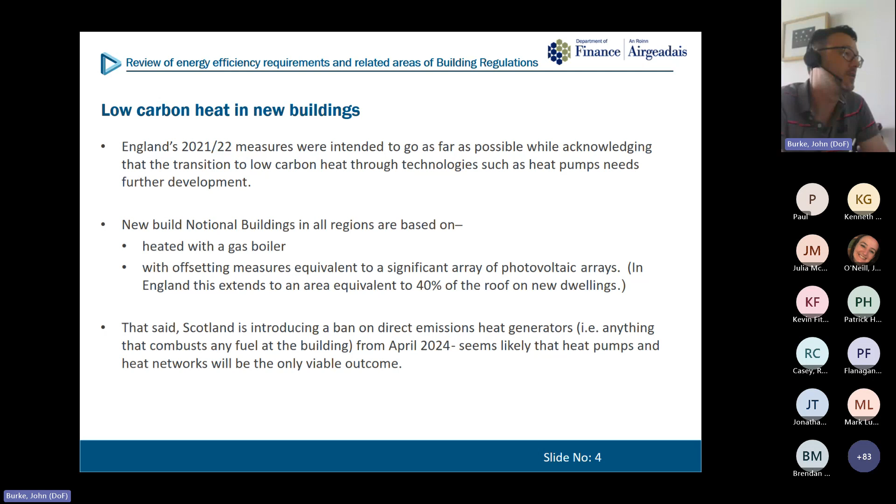So in terms of new dwellings, I'm expecting that everyone attending the seminars has some familiarity with building regulations, so you should be familiar with the notion of the current working practice.

You have a target carbon dioxide emission rate, based on the modelled assumptions or model performance of a notional dwelling of the same size and shape as the actual dwelling, but constructed to a very standardized specification. If you can meet the emissions of the standard building, or the notional dwelling, then you're deemed to have passed that requirement.

In Northern Ireland, our last uplift in 2022 brought forward manual betterment calculations to improve that. So if you're subject to the NZEB regulation requirements, you need to demonstrate a manual betterment of that, and we'll see an example of that later on. The phase 3 uplift we're looking at will be centred on dwellings, with 2 options, which would effectively remove the need to do that betterment calculation. The 2 potential options are for the notional dwelling: one following England's proposal of a notional dwelling specification based on a gas boiler and photovoltaics.

And then the other is looking at what happens if we were to move directly to a heat pump led specification. In that case we haven't put the photovoltaic array on the dwelling, but the heat pump is deemed to have the emissions performance requirements in that case.

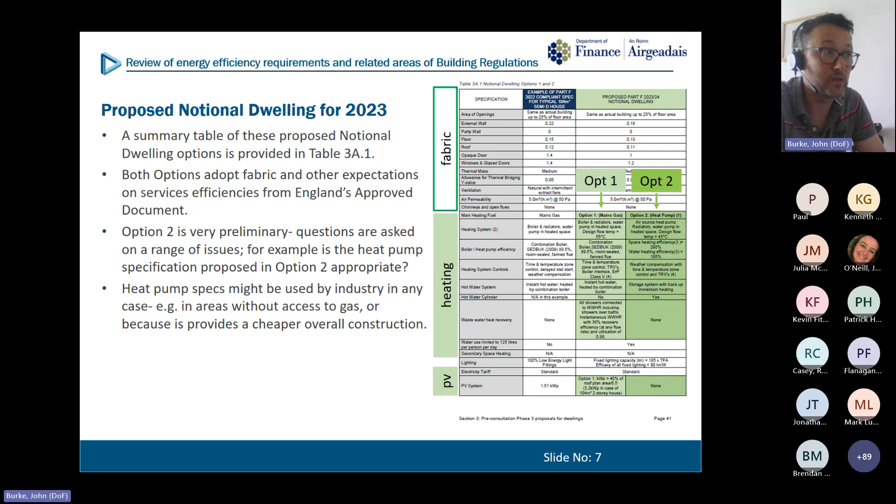So alternatives are likely to mean more heat pumps rolling out in either scenario. We've noted that 30% or more of new dwellings here are still being constructed using home heating oil, and that comes traditionally because we've had a Northern Ireland fuel factor, which we've highlighted alongside the Table 2.1 factors.

Those Table 2.1 factors previously, before the last uplift in England, gave easements on the emissions performance when you were using higher carbon fuels. It covered 50% of the difference, whereas with Northern Ireland adding the extra 1.14, there was no real penalty for using oil.

And you could construct an oil-fueled home and a gas-fueled home in Northern Ireland to roughly the same standards. So both our options, in option 1 and option 2, a really significant thing we're looking to do is remove those fuel factors. Those easement factors have gone in the other regions in the last uplift, and that's a really significant thing to be happening here.

It's going to be quite an ask, because it means the emissions performance really will have to match or outperform that of the notional dwelling specification.

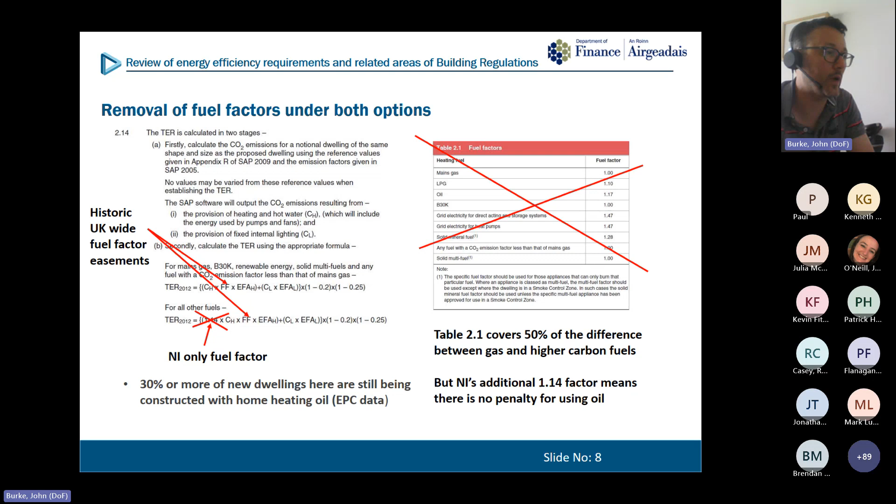So we've modelled a semi-detached house as a good interim. It's not detached, it's not a flat, and it's not a terrace. It's got a reasonable amount of fabric, so we can try and see how these things might look or work out. Capital costs haven't really been looked at yet, so we'll be interested in any feedback there.

But assessments of similar options by the Scottish Government in 2020-21 tended to suggest there was a net benefit to society of £46 million, whereas there was a net cost of £250 million in moving to the heat pump led option, similar to option 2. So that's why we're a bit reticent about just going straight ahead with option 2 and the heat pump led specification.

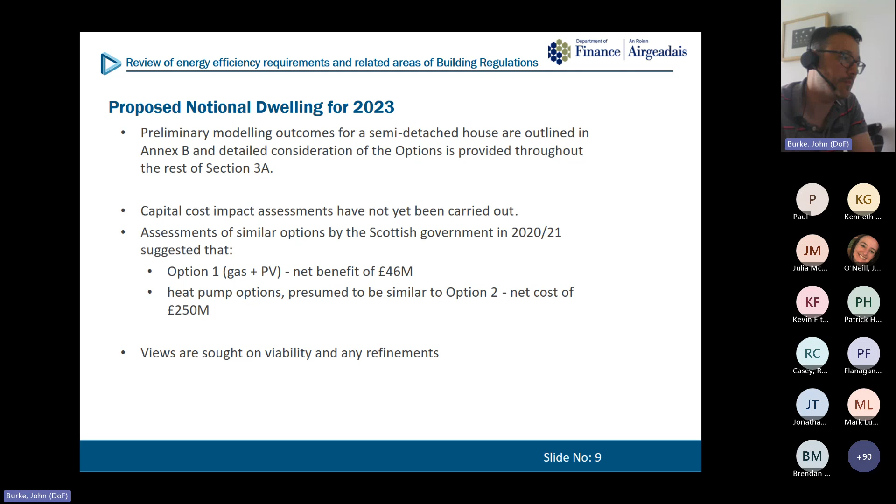And views are sought on the viability and any refinements we could make to see where that might be a better way to progress.

So just touching on it quickly, what we have in Annex B, Table B1, is 8 scenarios which we outline. Scenario 1 is our typical existing build. Scenario 2 is what's currently compliant with Part F using gas. Scenario 3 is if you use oil.

The SAP ratings that come from SAP 10 are based on SAP 10's estimated costs, which are themselves kind of out of date because they were developed back in 2019, just before the Ukraine crisis and the cost of living crisis. So those fixed prices aren't altogether as accurate, and the ratings generated from them aren't very accurate.

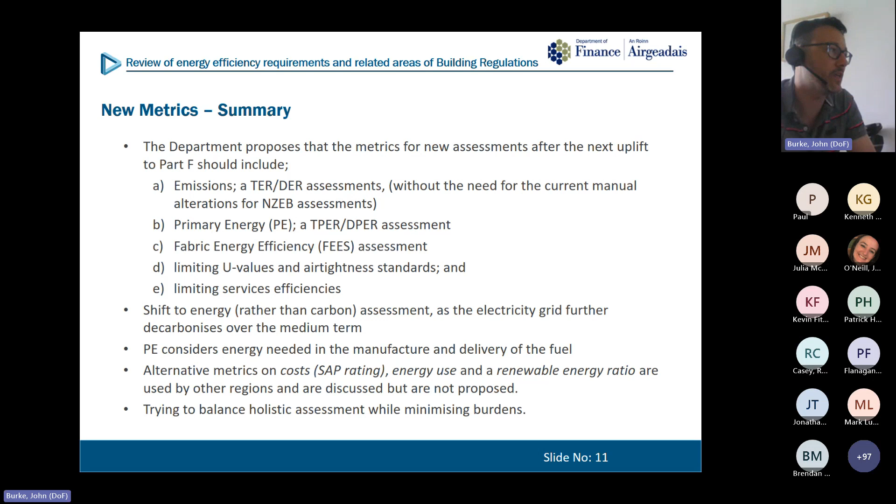In terms of metrics, these are quite important. The reason we've selected those 8 scenarios, certainly scenarios 4, 5, 6, 7, 8, is often quite informed by these metrics. So the new suite of metrics that will be required, following what has occurred in England and the other regions: one is the emissions metric. That's the current metric, and we're all aware of how that works. And I've noted again, we wouldn't need the current manual NZEB 40% betterment check or 25% betterment check for flats.

And then the primary energy is a new metric which would come in, and a fabric energy efficiency assessment is proposed as a new metric to be assessed. In reality, the actual dwelling, your design, would need to match or better these metrics, and they're all derived based on the performance of the fabric, in the case of FEES, the fabric performance of the notional dwelling.

So there are, of course, backstops to this: there's limiting U values and air tightness standards, and then there's limiting services efficiencies. But the general intention is to make sure and bring in some metrics that look at energy.

That would be FEES and primary energy, rather than just carbon, because as the electricity grid decarbonizes, if you ultimately had a carbon-free electricity grid, you could heat your dwelling with direct electricity, and there would be no restriction on that or problem with that, even though that direct electricity might be terribly expensive or not very efficient, because you're not really measuring energy if you're only measuring emissions.

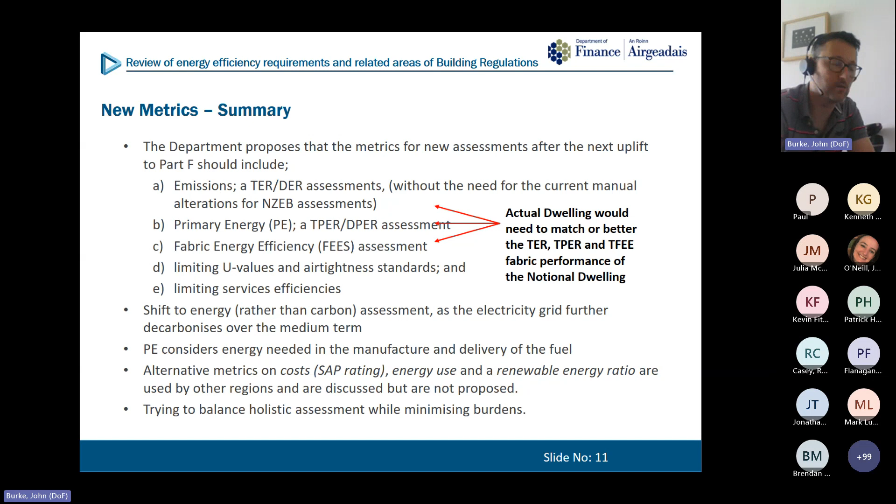At the center of all this, as you know, SAP calculates the kilowatt hours of each fuel that might be needed, and subtracts the kilowatt hours of energy generated and used in the building, or generated and exported. Then it converts the energy requirements into emissions or into primary energy.

The key hub of that is table 12 in SAP. If you take a minute to look at the primary energy factors and emission factors in that table, you find it starts to inform you about the viability of fuels and how they compare.

If you run with option 1, mains gas has an emissions factor of 0.21, so 210 grams of carbon dioxide for every kilowatt hour of mains gas burnt, and a primary energy factor of 1.13. You have to assess how other fuels compare against that to see how viable they might be.

You find that biogas, on the primary energy metric, is reasonably significant—about 10% more onerous than gas—and that proves significant when you actually model these things out. Liquid biofuels are similarly higher, but not quite as high.

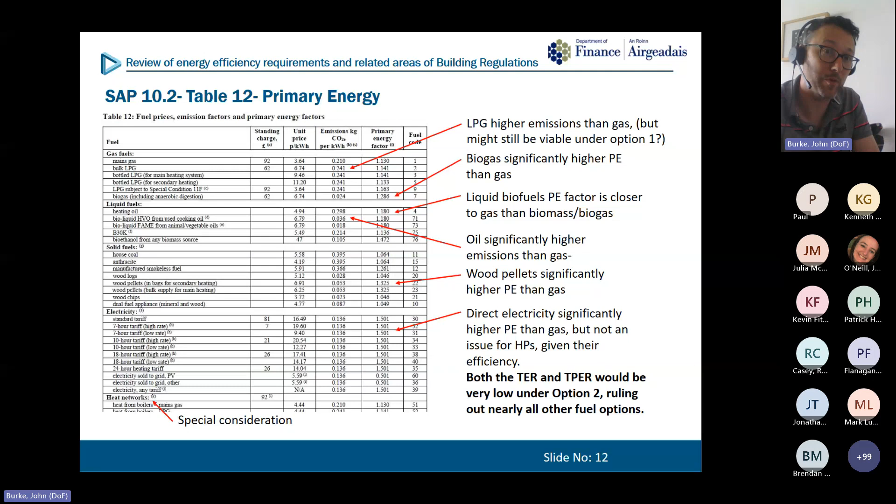Then you find you've got really very low emissions and very low primary energy targets to meet under option 2, and that makes other fuels really quite difficult to use unless they're somehow allied with a hybrid heat pump, as we've suggested. So we've outlined that in a fuel viability table. This is our best estimate based on the semi-detached modelling.

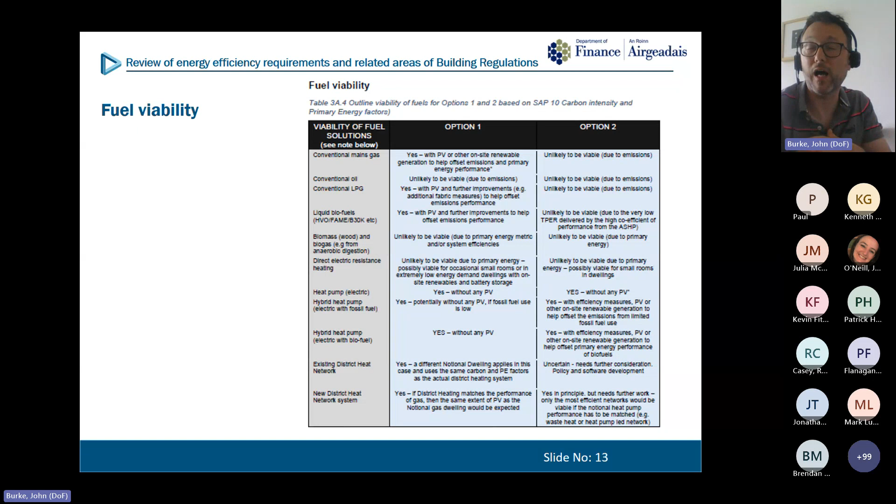You could find, for example, that some of these scenarios don't work because there isn't the same scope for improvement. For example, if you improve the fabric in a small mid-floor flat, it may not have the same benefit as having improved the fabric on our semi-detached house that we've modelled. But this is our estimate as to how we find some of the fuels viable. So we'd encourage you to look at that in more detail, because having backup options, alternatives, or other scenarios might be important when you've got a grid to think about, and other things going on that might be operating beyond strictly building regulations.

Very important comment at the bottom there, which is we really are under pressure. We're expecting that there will be a lot of pressure to ensure that heat networks remain viable under all policy options. And a mechanism has been developed, which we'll talk about

under the option 1 notional building, as to how to attend to that, because England have been through it all. It would require us to develop our own approach. If we were to take on option 2, we would have to develop another technique, or find another solution, or work out some other guidance and difficulty.

So there's quite a policy hurdle in trying to ensure, if you went to the very low emissions and very good primary energy performance that the heat pump building notional dwelling would set, you would have to have a completely different policy for connecting to heat networks if they were to be viable, because they simply wouldn't be able to meet those requirements from our understanding, or at least conventional district heat networks may not always be able to do that.

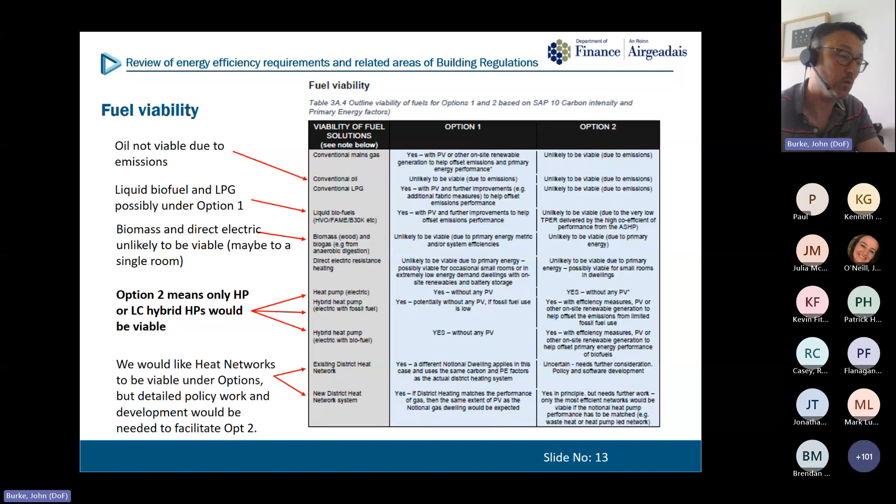And you don't want to make heat networks, which always have the possibility of future decarbonisation under other legislation, you don't want to make them unviable because you built a whole load of new houses and they weren't allowed to connect to it.

So the second metric then, that was kind of discussing primary energy and emissions, but the other metric that's important here is fees. It should probably be called proposed new metric 3 there, really, but it's the second new metric. It's the third metric. And that is really trying to encourage a fabric first approach.

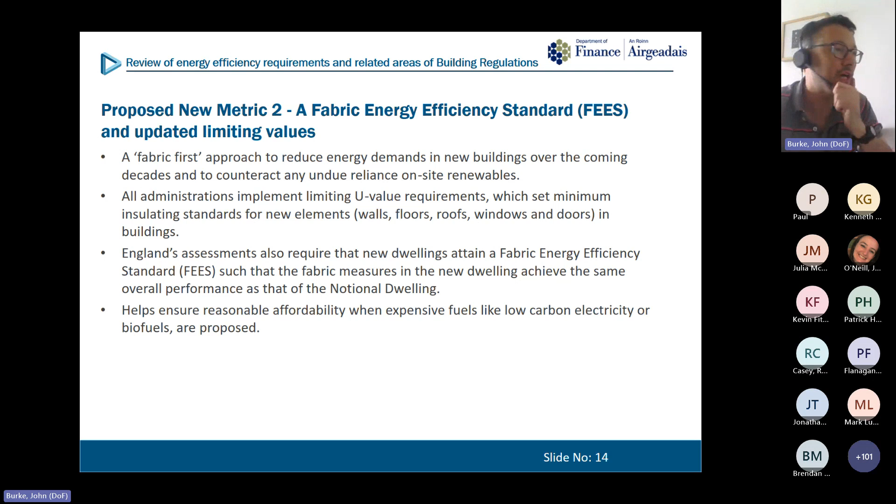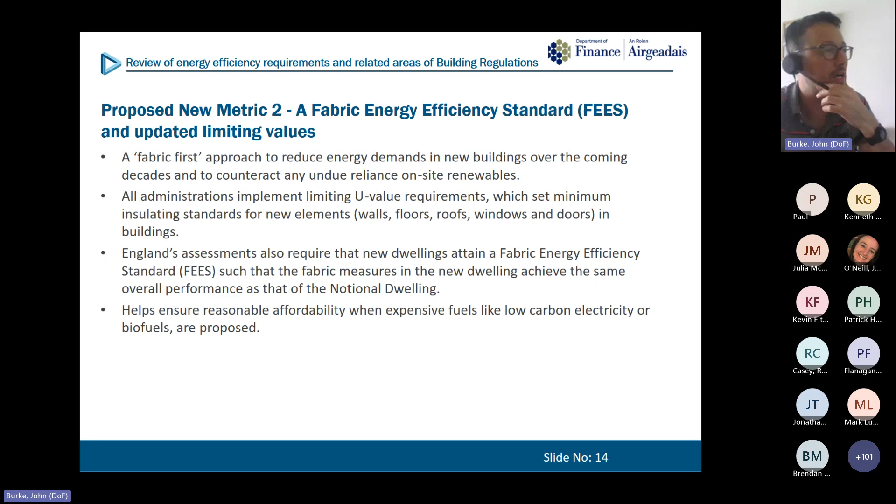I expect a lot of you might be familiar with it from England, but it's alongside or in addition to the limiting U values, and its intention is to ensure that the energy demand is low. It's really a bit of a holistic assessment of the fabric aspects of the specification. So that's the insulation U values, the thermal bridging, and the air tightness, and it makes general assumptions about everything else and models the two buildings that you model your performance against the overall fabric performance on that.

So in theory, you can improve your thermal performance in any one aspect. You could, for example, improve your thermal bridging, and that might allow you to have slightly worse air tightness, or it might allow slightly worse U values than the notional dwelling. England has been requiring this since 2014, but not at anything like the onerous level that would be applied here. The previous standard had higher U values assumptions, and it had a 15% tolerance. That all goes. You would have to effectively match the performance.

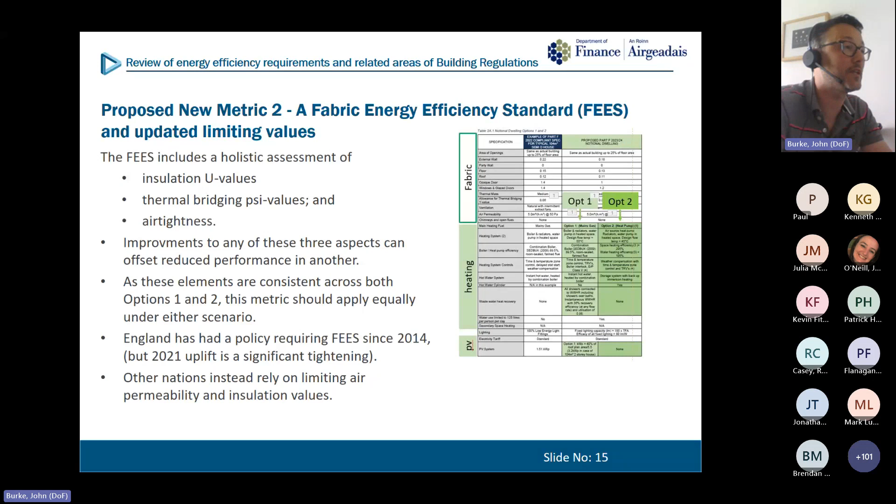So if we zoom in, these are the kind of U values you would really almost certainly have to build to, unless you can obtain some kind of room for manoeuvre on your thermal bridging and beat the assumption in it, or on your air tightness, which I think probably would happen, but it may not give you a huge scope for relaxation of your U values.

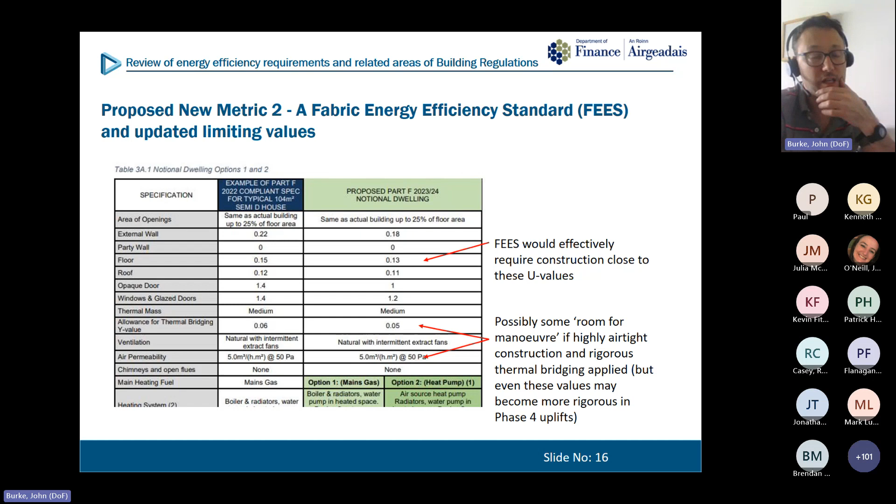You might be able to beat the 5 that's assumed in the notional dwelling specification, but it could be difficult to do much more. At least that's our kind of finding. But again, we're open to hear how it's working in England. Are people finding these U values are actually being achieved? That's the kind of information we'd be keen to hear.

The document goes into a bit more detail because Wales and Scotland don't have a fees approach. They simply go with higher limiting U values, which sounds a bit more straightforward and simple, but we're concerned it doesn't give enough, or we think it would be better. Fees is better because it gives more incentive and encouragement to explore the thermal bridging and air tightness, but thermal bridging in particular.

And so their U values are there, their backstop or their limiting U values are there, and the other important consideration in this is something that we've spoken about in our last uplift, which is it's important to consider whether it's elemental, so whether it's really, really strict. So for example, on this table, Wales have a value of 0.18 as the limiting U value for their external walls, and that is it. You can have one wall that's worse, but all your walls on average have to have that 0.18

when they're averaged out. Whereas in Scotland, there's a lower U value of 0.17 for walls, but it allows whole building offsets. So you could have a much higher, better value in your roof than is required, and that will allow you to compensate. And that whole building approach is currently in place in our Northern Ireland standards and is currently in place in the Republic.

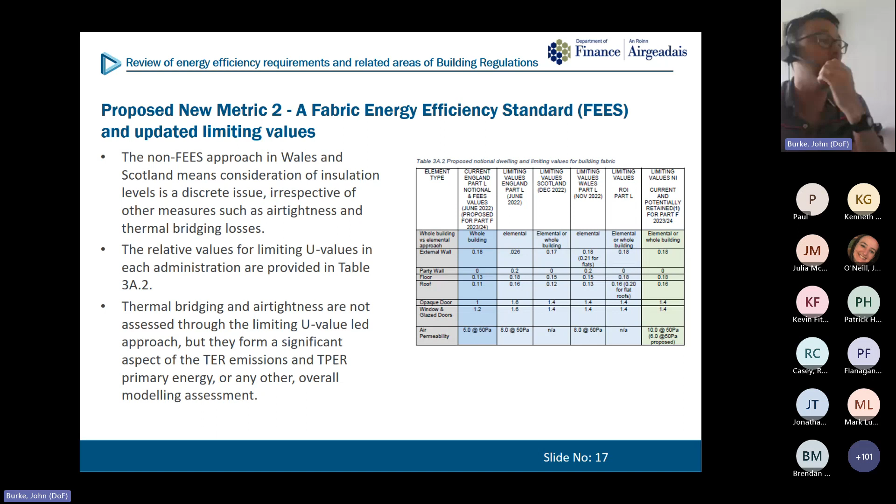So just to come back, if we adopt the limiting values that are there in England, they would be reverting to a pure elemental approach rather than allowing a whole building assessment. But for the FEES assessment, there is a whole building approach because it's the overall model that gets looked at. So that's what I think we talk about in this slide.

Yes, so the FEES regulation and guidance is really why we think that would be the principal determining factor in new dwellings, certainly, rather than these limiting values. We think that these will be quite challenging for industry. So yes, there are different notional dwelling values for Wales and Scotland and the Republic of Ireland's notional dwelling.

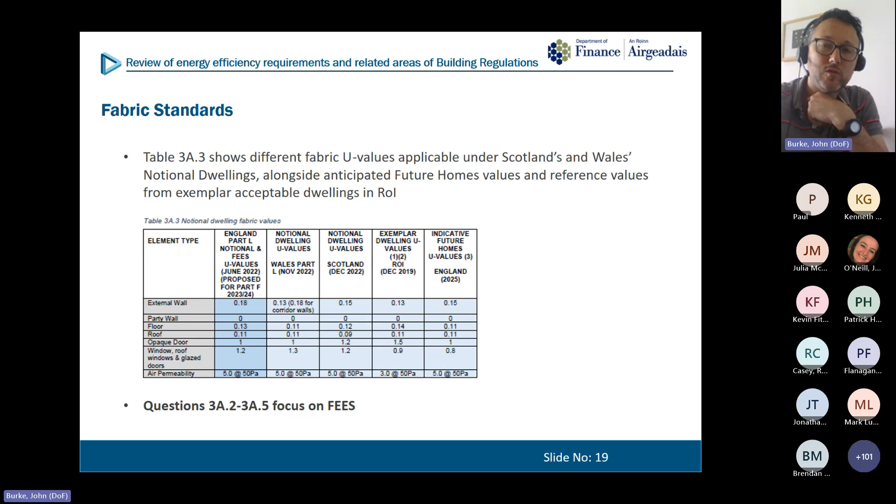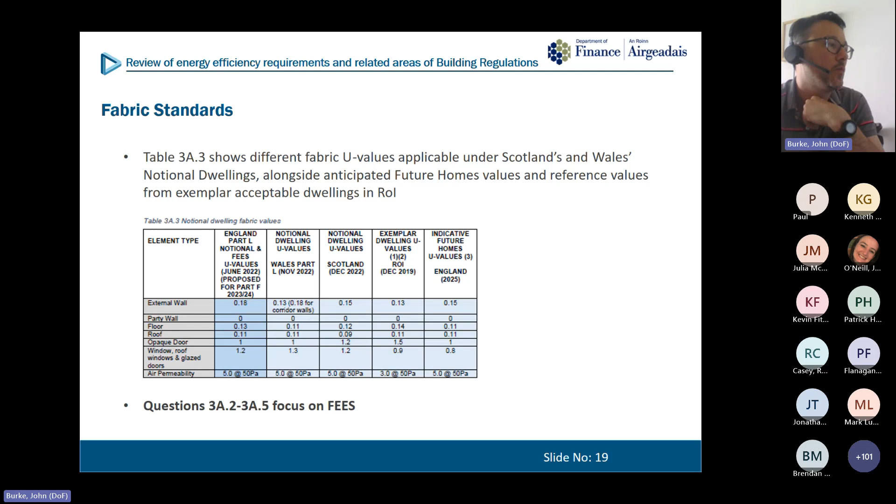But again, as we've said before, we're not entirely sure without FEES whether, whilst the numbers appear lower, they would actually have to be achieved in practice if you don't have this FEES requirement. Is this level of performance actually being achieved in practice on that notional building, albeit it is setting a tough emissions target?

So that's what it comes down to really, the expectation around photovoltaics and whether there would be room for more photovoltaics or other renewables, which would allow an easement on these outcomes in Wales and in Scotland. But in England, you would really have to achieve these U values or the same overall fabric performance through the FEES requirement.

So yes, and these are the indicative future values that have been offered in previous Future Homes statements from England, which are worth bearing in mind. So that's the scope for further improvement, perhaps.

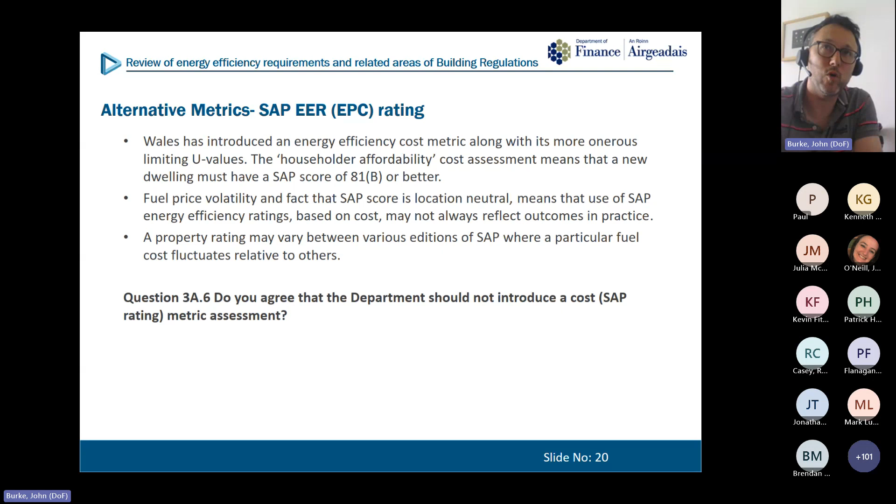So one other metric that was discussed and is used by Wales is a SAP EPC rating, or it's the EER, the energy efficiency rating, which really relates to the relative running cost of the home. And we're concerned about using that because of the fuel price fluctuations that can occur. And already I think SAP 10 is showing that, and the differences between the cost assumptions in it and the reality that we looked at previously are indicative of difficulties in using such a metric.

Another one that was called for by various groups, and we can see a lot of sense in, is the energy use intensity. So that's looking at the pure kilowatt hours of each fuel and adding that up so you have a total kilowatt hour. But the difficulty with it is it doesn't help you assign a weighting or a value to that. So electricity is a kilowatt hour, gas is a kilowatt hour, yet electricity is really expensive, and gas is really high carbon. So the weighting around that maybe is a bit of an issue.

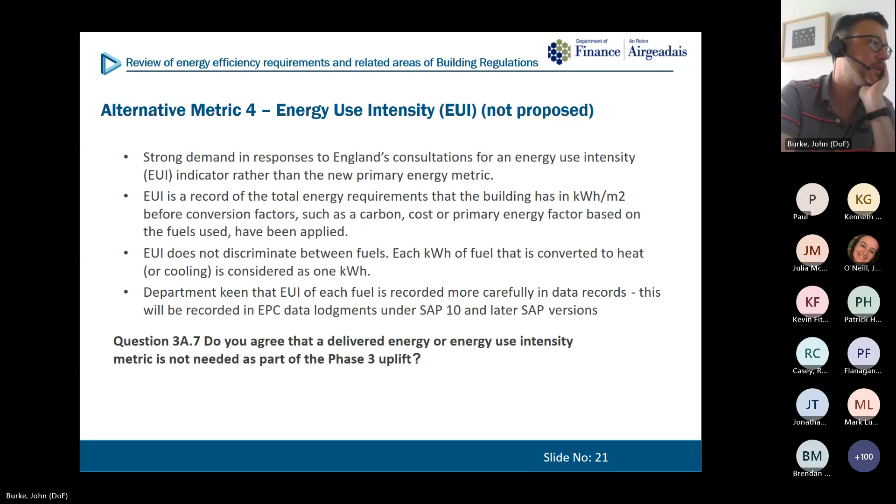The fifth alternative metric that we looked at was renewable energy ratios. So that's a procedure in the Republic where I think 20% of the primary energy use of the building should be able to be demonstrated to have been delivered from renewable sources.

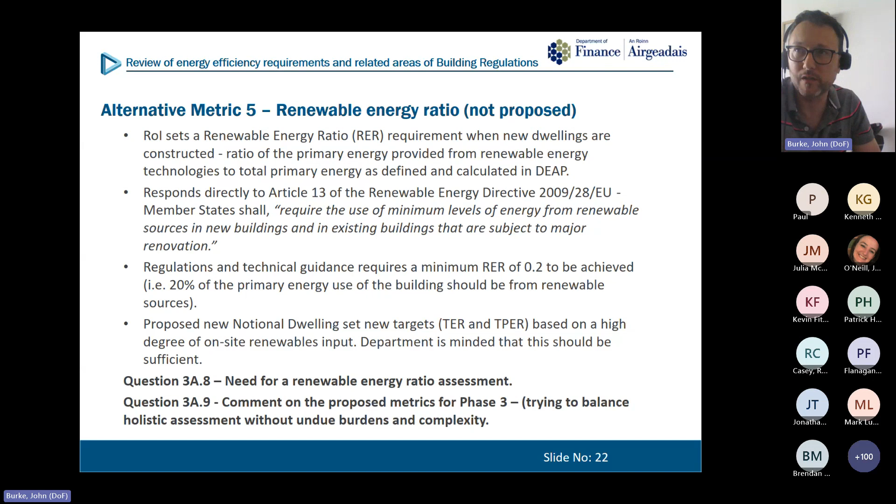And the overall conclusion when this has been looked at in the past by other administrations is generally that the metrics that we're proposing, we think, provide a sufficiently robust set of new targets that you're going to have a substantial renewable proportion in your dwelling, be that you're using a heat pump or photovoltaic arrays or some other renewable technology. We think that effectively a very high renewable energy proportion is going to be needed in any case with the notional dwellings that have been put forward.

We have a section which asks a question about block averaging. So this is where if you have perhaps a block of flats or a row of terraces, if the average TER, an emissions rating, or the average TPER beats the, if you average that out across the block, that's kind of acceptable. We have a little kind of residual concern, but we've no real evidence, to be fair, that perhaps glass box penthouse apartments or end terraces or some buildings might be more adversely impacted by that compared to their mid-terrace or mid-flat

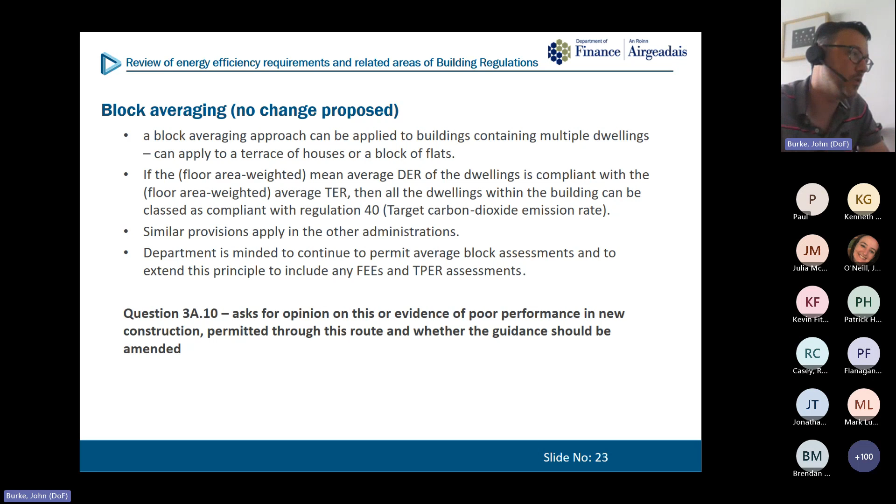equivalents. So we're just always mindful as to whether there should perhaps be some kind of limit to the extent of variance from the average that should be permissible for that, or whether each individual dwelling in its own right absolutely must meet the relevant targets. So we've asked a question around that.

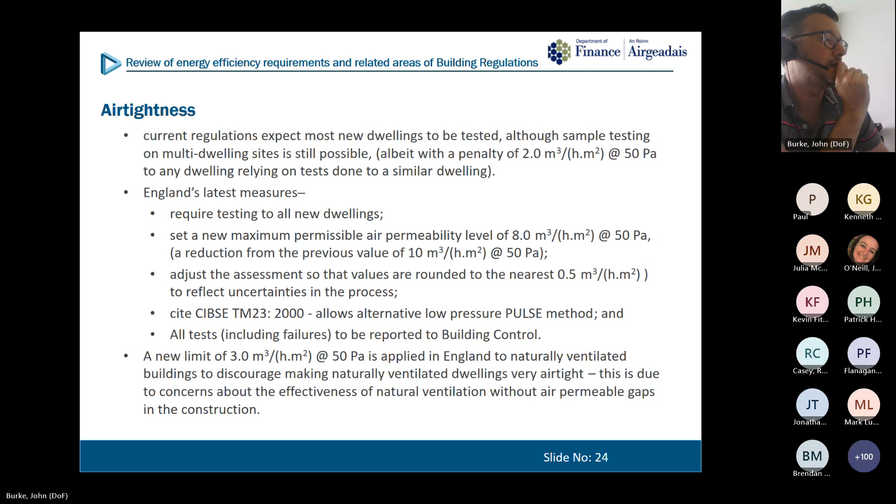Air tightness we've looked at, and the current regulations do still allow us in Northern Ireland for sample testing on multi-dwelling sites. We think it is still possible, albeit subject to a penalty. But England's latest measures really just require all new dwellings to be tested. They set a maximum permissible air permeability level of 8, which is a bit of a reduction from 10.

They adjust the assessment so that the values are rounded because it's kind of spurious accuracy to think that 0.78 or something is there. They're all rounded to the nearest 0.5. So you have a value of 0.5 or 1 or 1.5 or 2 or whatever. They allow a new pulse method to come into play, which is a lower pressure test at 4 pascals, and then they convert that to the 50 pascal assessment. So there's a mechanism for that.

And then a final thing, which actually we forgot to include perhaps or didn't emphasize sufficiently in the consultation, but all the tests, even failures, have to be recorded and reported to building control. That's an expectation of the assessment. So that should help building control alert if they're seeing a sort of chain of problems there.

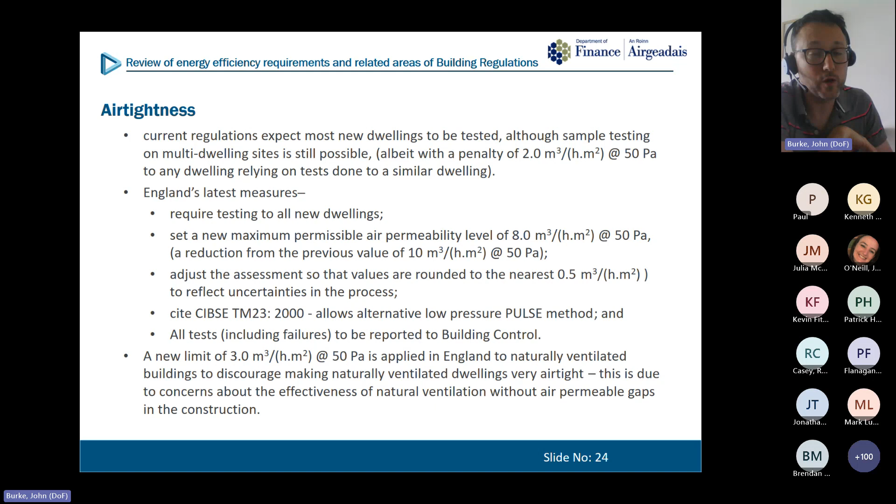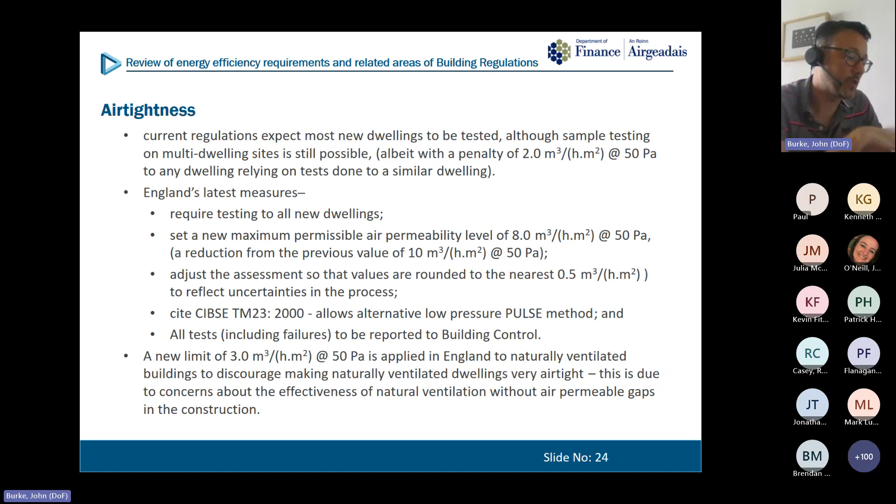The final thing to be aware of, and this is an interaction that we'll talk about in another session on ventilation, but there's a limit to a naturally ventilated building. So a naturally ventilated building must have an air permeability of 3 or more. There are concerns that if you don't have that level of inadvertent leakage, I suppose, or air permeable gaps within the construction, then there seem to be risks emerging around natural ventilation. So that's a kind of limit or a cutoff point if you want a naturally ventilated building solution.

If you have a fully mechanical solution, you can keep going to air tightness levels below 3. But it does need to be adequately designed. We ask the question about the new limit that England have of 8. We'd be interested in views as to whether this could be reduced. Our statistics would suggest that 8 would affect very, very few buildings. From a while ago, it was fewer than 1% of new dwellings would be impacted by the cutoff at 8. And so we thought that setting the level at 6 or at 5 from the 2020 test results looked at affecting more buildings.

We're trying to look at where the appropriate level is, but we're mindful that as you push that limit down, you're pushing more buildings perhaps towards mechanical ventilation solutions. So we're trying to get the balance right, and we'll be interested in opinions on that. And the final thing then is that the changes to England's guidance also emphasise the need to ensure air gaps at insulation junctions are eliminated. So you have to be very careful that your insulated panels, if they're cracks and gaps, are sealed.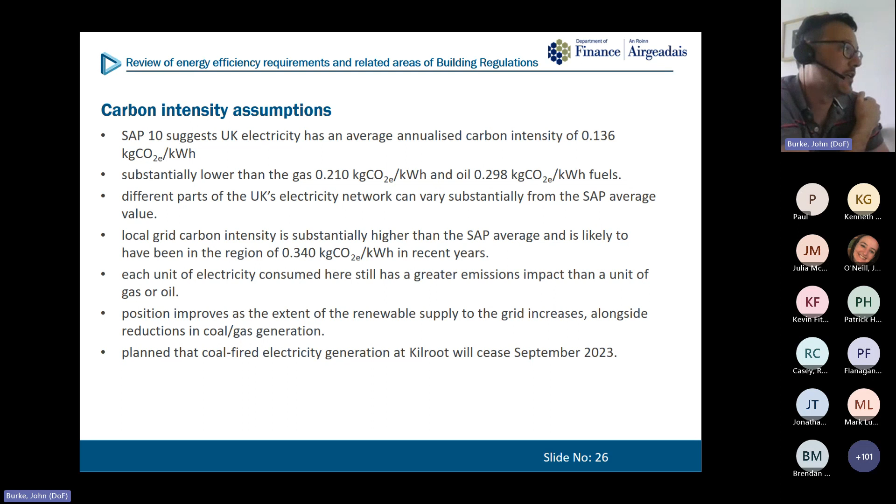Now it is coming down, but because we don't have nuclear and because we burn more coal, our carbon intensity here is not as good as the UK average, despite having a higher percentage of renewables contributing. But that is the current state of play. It's not the direction of travel, and whilst our buildings built today are facing that from day one, over their lifetime that ought not to be the case. They ought to come down towards the kind of SAP levels, or even better than that, as the grid decarbonizes. So we think that's an interesting thing to note.

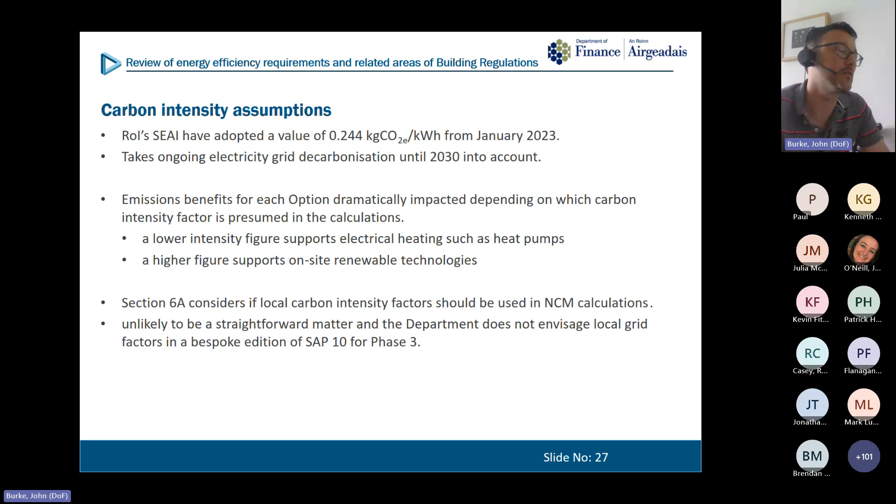We talk about the value that's been adopted in the Republic, which is a somewhat forward-looking projection, and it's a single electricity market after all. And the benefits in terms of carbon for each of the options are displayed on a table, which we'll come to, and how that all feeds through. And section 6A talks about this in more detail in terms of long-term considerations and what we do about that. But for phase 3, we're really thinking we'd have to adopt SAP 10. We don't really see much scope for implementing local specific carbon factors for different fuels, certainly for phase 3.

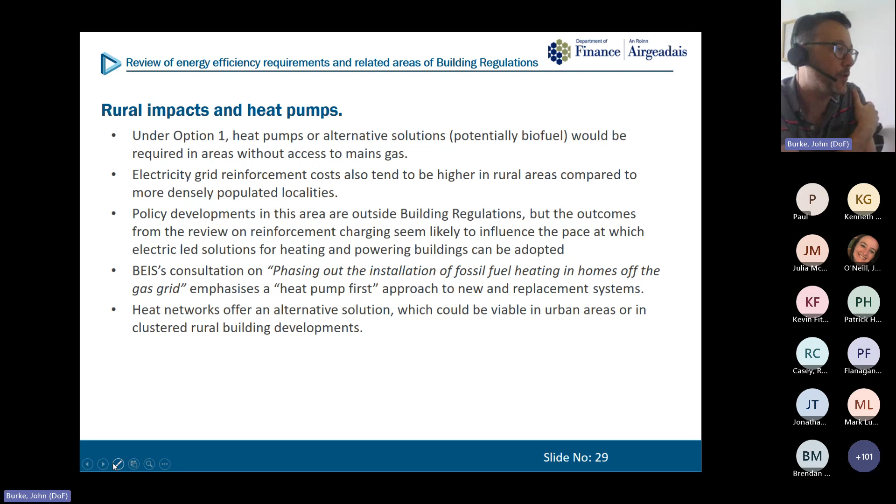So we'd be looking at some kind of reintroduction of fuel factors, a bit like we already have, so that oil could maybe be used, or other lower cost options would still be available. Or the other thing is to move towards option 2, which is to be equally harsh and require heat pumps everywhere as the only realistic solution, i.e. adopt option 2 for both scenarios. But that's the issue that's explored in that section.

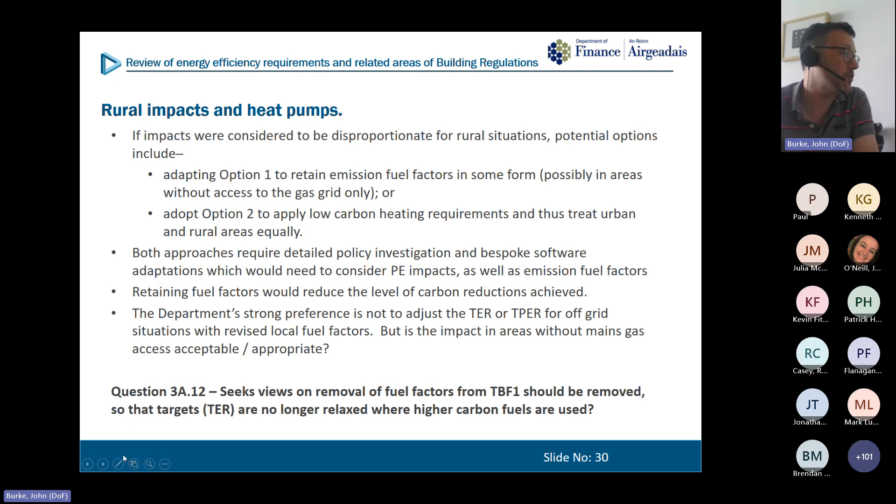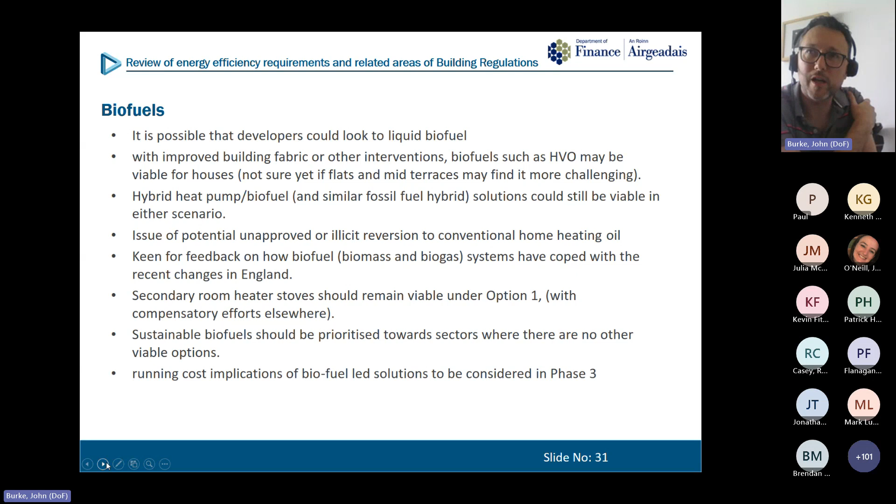We also wonder about just avoiding a home that's fitted with a liquid biofuel boiler and the risks of that maybe inadvertently or illicitly being reconverted back to burn conventional kerosene without anyone really particularly taking much notice of it. So we've kind of a bit of an issue there.

There's an aspect of this we need to draw attention to, explored in the document, about export and non-export connections. The current assessment will assume that all the energy generated by the photovoltaic on the roof of a dwelling will be used, either within the dwelling or exported. It could be that in Northern Ireland you have a higher degree of non-export connections because the grid can't take that export, and once SAP 10 were to become the new assessment...

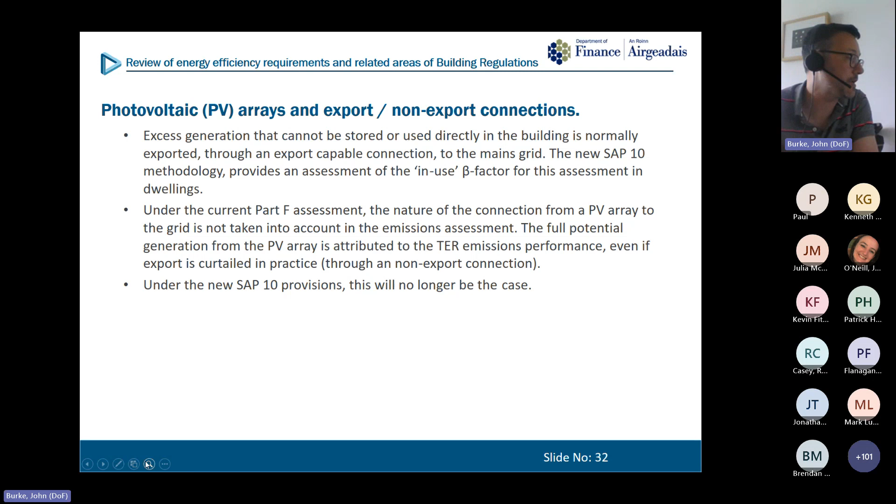That unexported electricity, i.e. it's curtailed, it's not generated, the system switches off to prevent that, would not be contributing to your assessment and giving you any benefit under the building regulations any longer. So you could lose perhaps 30, 40, 50% of the benefit of your PV if you don't have that ability to export. Or the answer to that might be because there's a new beta factor...

A new self-use aspect to the calculation within SAP 10, and that would mean that by adopting battery storage or hot water diverters or something like that, you could maybe improve the extent of self-use, and that would avoid your issue.

The amount of photovoltaics is just another issue, given that 40% of the roof is the expectation. The current G98 limit for a single phase connection is 3.68 kilowatts. So basically, if your footprint or the plan area of your roof is greater than 59 square metres, you start to get over that threshold.

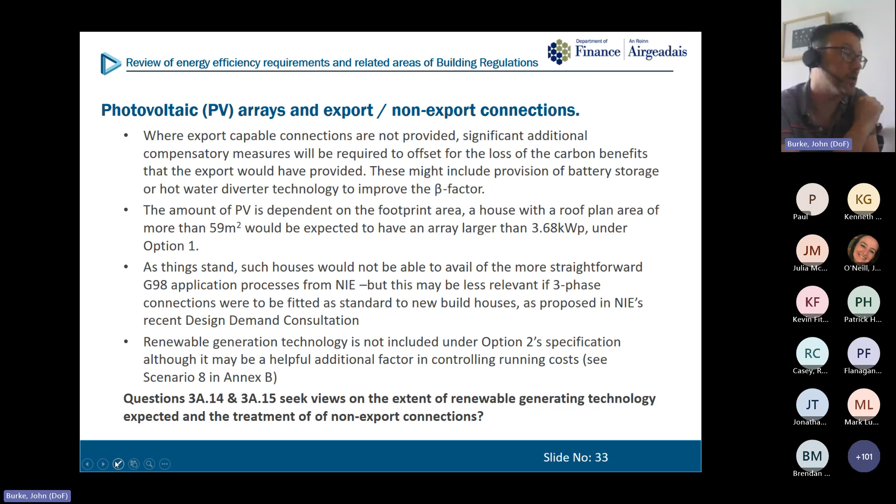Now, that might not be an issue if 3-phase connections to homes is the standard way forward, and NIE is kind of consulting and looking and taking that forward. So the utility regulator might look at that as well. That would perhaps not be such an issue in that circumstance, but it could be an issue in single phase connections. And renewable energy generation technology - we're back to this issue that it's not being included at the minute under option 2 specification, but it could be a helpful additional factor in controlling running costs. That's outlined in scenario 8 in Annex B.

Really important, this is a move to low temperature heating systems. This is a kind of change in the design expectations for all new heating systems, and that also applies when they're installed in existing buildings. So the new measures from England and elsewhere require that new wet heating systems should be designed for a flow temperature of no greater than 55 degrees centigrade.

So these low temperature systems need bigger pipework, bigger radiators, and if you go lower in temperature, they need even bigger radiators. It means condensing boilers can operate more effectively, but it also facilitates any future retrofit to low carbon heating, or would help work with a heat pump. In fact, heat pumps probably would work better at even slightly lower than 55, possibly at 45. And so it would apply where a new system is installed in a new build or in a replacement system.

Some stakeholders have suggested it should be 45, but there's a balance there, particularly in relation to installations in existing dwellings, because the size of the radiators could be really quite an issue if the fabric isn't of the level that we're talking about in new builds.

The other important consideration is that there was no introduction in England to require hot water storage tanks as part of the work, or even space for hot water storage tanks as part of the new dwelling installation. So we're kind of interested in whether maybe a requirement for a potential future hot water tank, if you have a combi boiler installation at the minute, makes sense. We're trying to future-proof for potential direction of travel, but we appreciate that's a floor area that's expensive to build, so that has to get the balance right, and England certainly didn't include it.

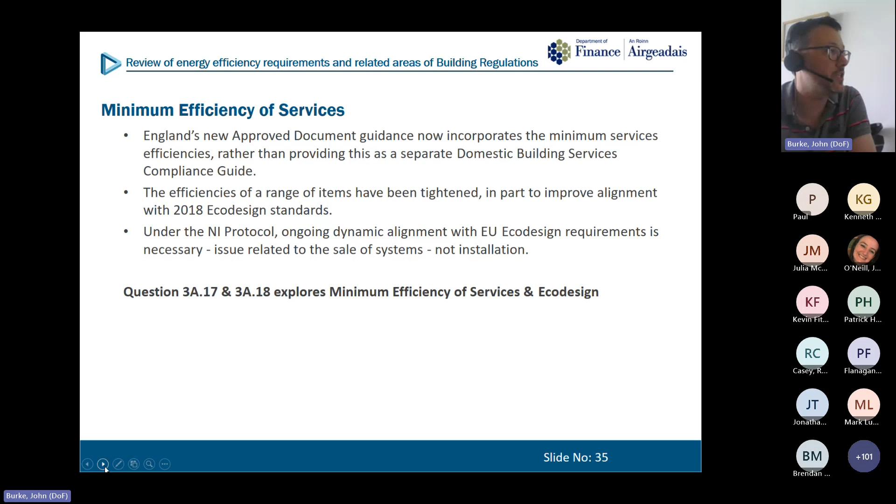There's a question. Hello, can you hear me? Yep, we can hear you fine. Yeah, okay, sorry, yes, I seem to drop out there. Did you hear on efficiency of services?

Yes, that's okay. So there's a new technique or addition: calculations on water efficiency. England's Approved Document G outlines two methods, a fittings-based approach or a whole building calculator. If you can achieve and demonstrate 125 litres per person per day, you get the associated heat benefits of that in your SAP assessment.

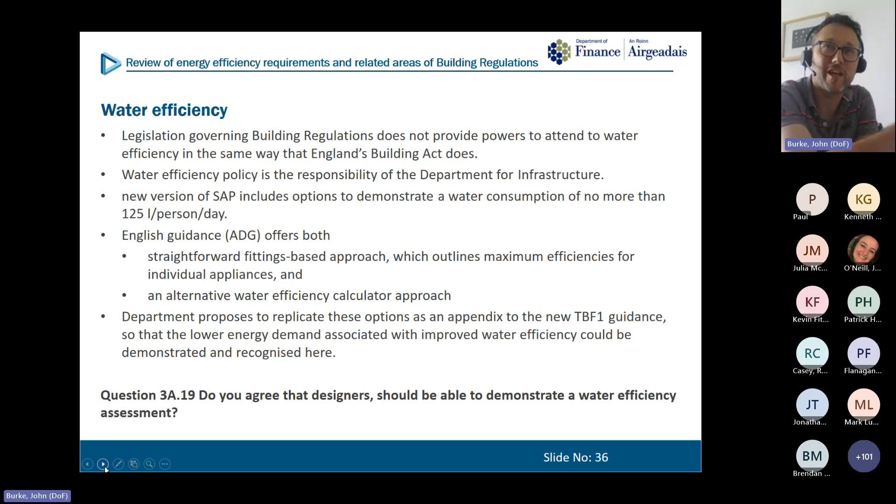The expectation is that we would incorporate that guidance and allow it to be used, even though we don't regulate for water efficiency — that energy benefit from it would be part of our assessment.

In terms of heat networks, a bit of background — I know they're not terribly common locally at the minute, so there's not a lot to draw upon. But the CCC, the Climate Change Committee, suggests it could support 20% of the heating requirements for buildings in the UK, and documents in Ireland suggest it could be up to 50%. So maintaining that, and some new technologies coming forward seem to offer good prospects, with geothermal and combining with waste heat from other buildings, which otherwise can't really be used.

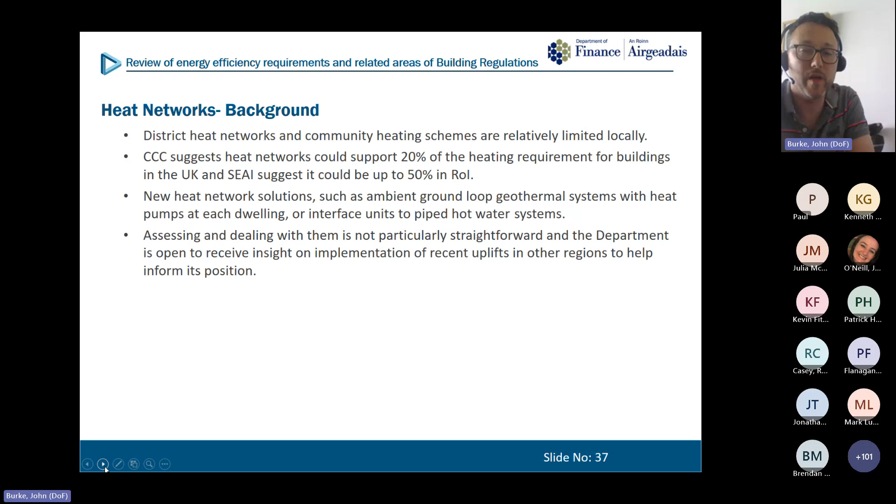Assessing and dealing with heat networks isn't particularly straightforward, so we're open to receiving insight on this, and we're working with our DFE, Department for the Economy, colleagues on it. In England's option 1, if you're connecting to a new network, it's expected that the new network will conform or work as well, with the same characteristics, no worse than gas — or if they are worse, you'd have to compensate somehow, in terms of primary energy and carbon performance. That's if you're building a new heat network.

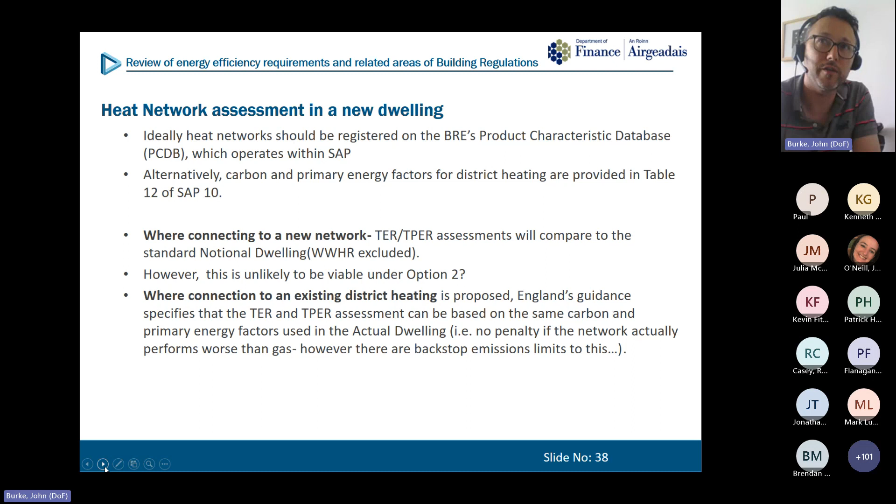If you're connecting a new building to an existing heat network, you're allowed to use the existing heat network's characteristics, and you swap the gas boiler. The software will swap the gas boiler's characteristics out and put the heat network characteristics in, so the system can work. We're not clear how this could work if we were to progress with option 2, because we think it's very difficult to see how any heat network could match the performance of the heat pump under option 2. So there would be quite a bit of policy work, software development, and outworking needed to make sure that was viable if we went with option 2.

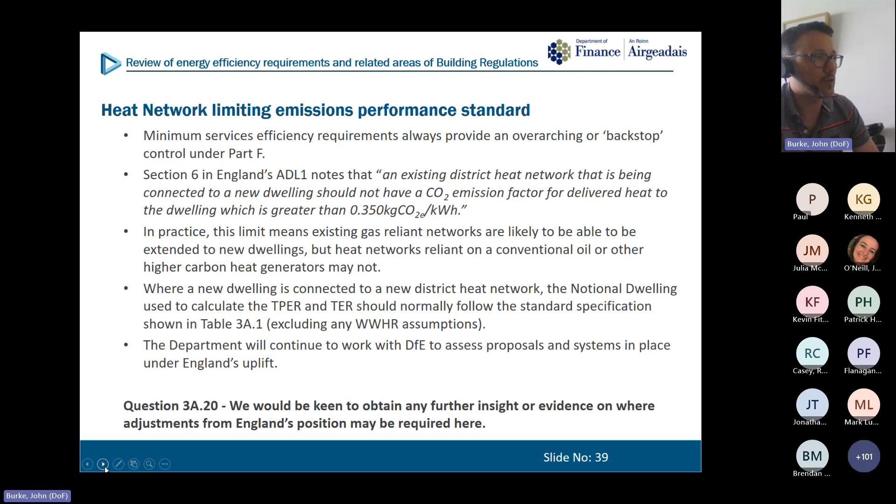Just to note, while you can connect to any existing heat network, there is a limit — 0.350 kilograms of carbon dioxide per kilowatt hour — and we think, taking efficiencies into account, a gas network would be acceptable, but an oil-based network probably wouldn't be. We'd be interested if anyone has anything to say about that, and how these systems have been working under England's uplift, or any experience of that, just to make sure we're operable here.

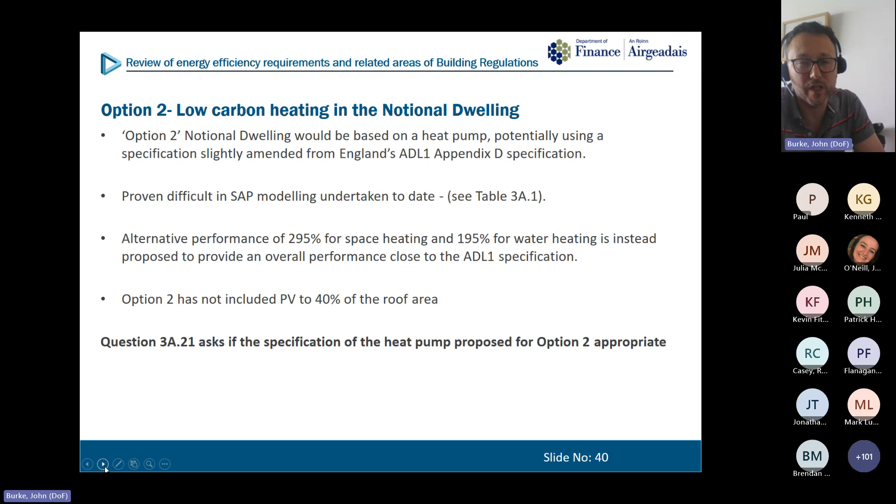So, aware of time again — we've questions about low carbon heating and whether there's a specification in Approved Document L1, which we initially tried to draw upon, but had to adjust slightly to get systems that actually work. We'll be taking that up to see if anyone has advice on the heat pump specification proposed in option 2. That's again more policy work needed, likely to delay things if option 2 were the method taken forward. I think most people will appreciate the benefits or pros in supporting a heat pump-led solution.

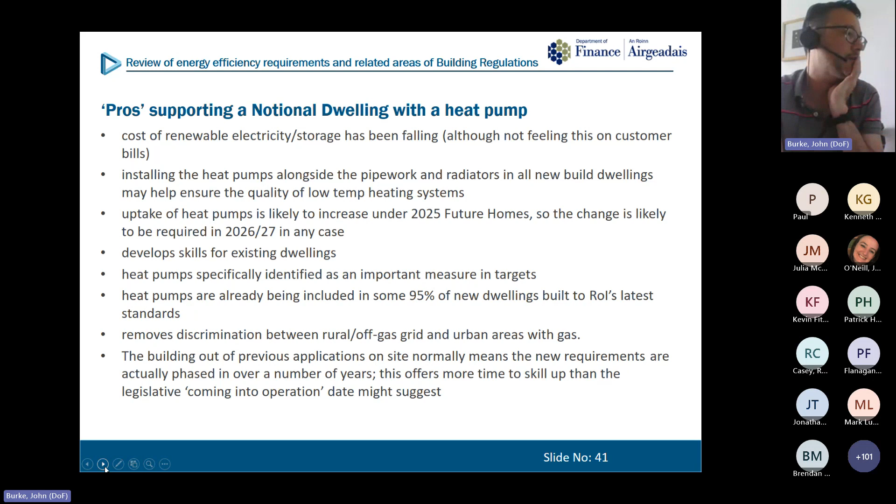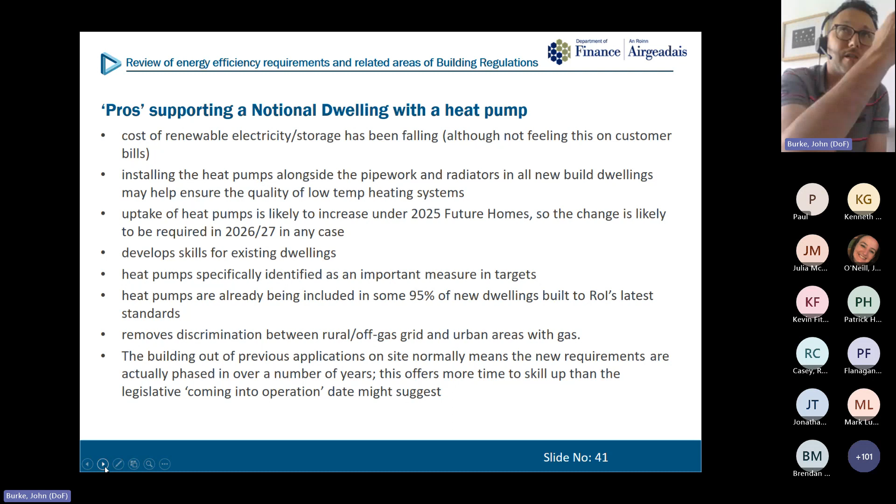Obviously, if we were to require a new build, a significant issue is that it would help people prepare, get ready and skill up for installations in existing dwellings, which is where the real market is going, or where the real need for reform is needed. Heat pumps have been rolled out at a fairly significant scale in the Republic of Ireland with their renewable energy requirements, and heat pumps fulfil that requirement quite straightforwardly because their EPC metric has a BER and things like that.

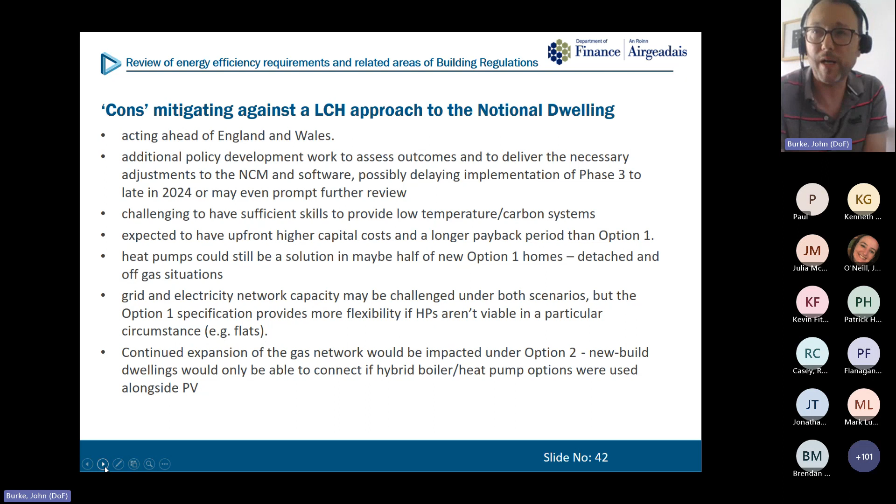But we still have this issue. We have a list of cons here, but we have an issue about capital costs. We have an issue about the grid network capacity - we're not sure, or we'd want to try and be more sure about that. You've also got issues about how the gas network would function and what the impact would be on the gas network and on gas policy. And of course we've got the running costs and a consideration of heat pump networks, or heat networks, that we've discussed.

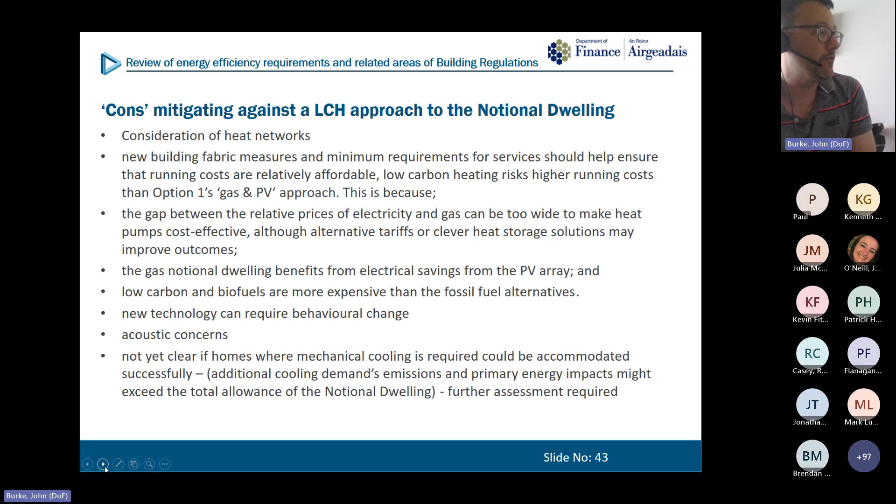Final point in option 2, which I think is significant, is we're not yet clear if homes where mechanical cooling is required - so if our new overheating requirements, which will be discussed in another session, were to require flats - really the only way that a flat or a home could be built, perhaps if it was in a noisy or polluted area and couldn't use natural ventilation, the only way it could successfully cool, having tried all passive measures, was with air conditioning. Would that mean that with such onerous targets having been established by the heat pump, that flat wasn't really viable to construct? That's another issue we think needs to be thought through if you were to go with the heat pump led approach.

And it's all really coming back to this issue that our resource and department management is really geared towards trying to look and learn from other places and follow England or follow another territory, as opposed to developing its own approach. So on the likes of this, that endeavour, or ambition, is relevant.

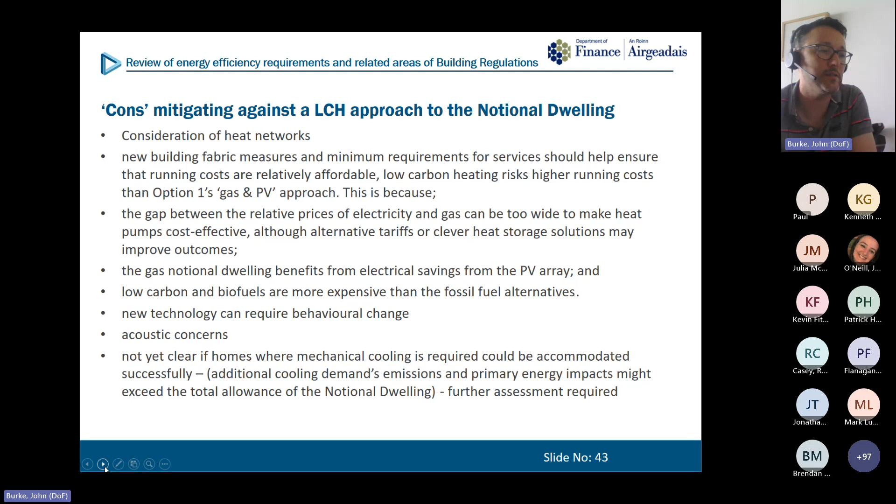So we talk about the viability and the risks associated with these options. We look for your input on that.

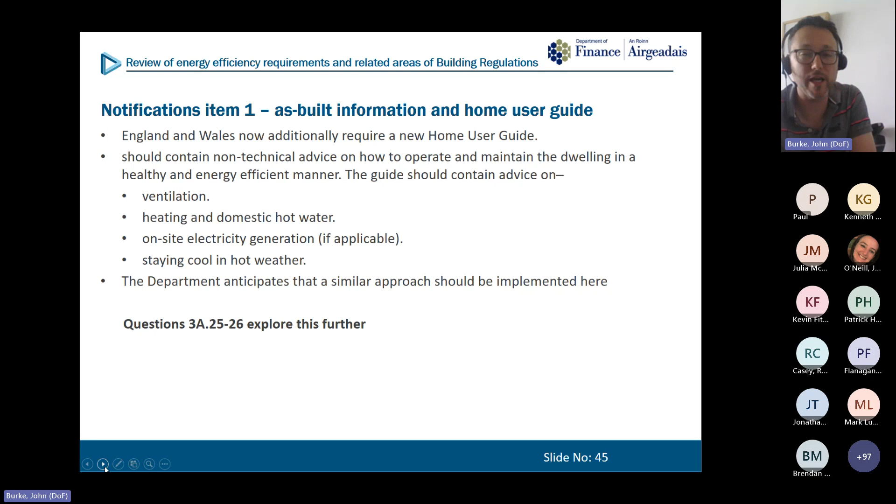Some notification issues. There's two. One is about as-built information and having a home user guide. So a new home user guide is needed. We've provided the link to that, and you can download the link that applies in England and see their document there. We're expecting that we would follow suit. If anyone has anything to comment on that, or thinks that's unwise or unnecessary, or has substantive comments to make on that, we'd certainly take that evidence in.

And then the other thing is that geolocated construction photographs and evidence of construction would start to be required, and the mechanisms for that seem to be built with the accreditation schemes, which would be the only people able to access the software to make the lodgements and things. So these things start to be required to try and improve and minimise the design versus as-built gap, and to provide surety of construction and compliance.

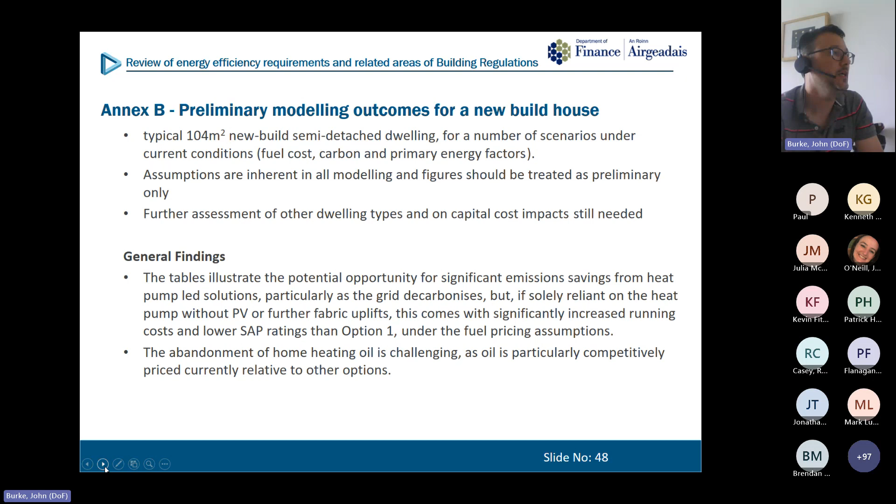So as I say, we've modelled some preliminary outcomes, and they're all there to be picked over a little more, but we have to emphasise they're based on a restricted scenario - our typical 104 square metre new build semi-detached dwelling. Need to be careful - for example, in scenario 6 and 7, improving the fabric meant that LPG and HVO were potentially viable against option 1, but that might not be the case if you have very little fabric, if you have a mid-floor single aspect flat, for example. So it's not the case that these will always be viable solutions against option 1, and maybe in hindsight that could be clarified in the notes below, but that's the thinking there. Just a bit of a note of caution on that.

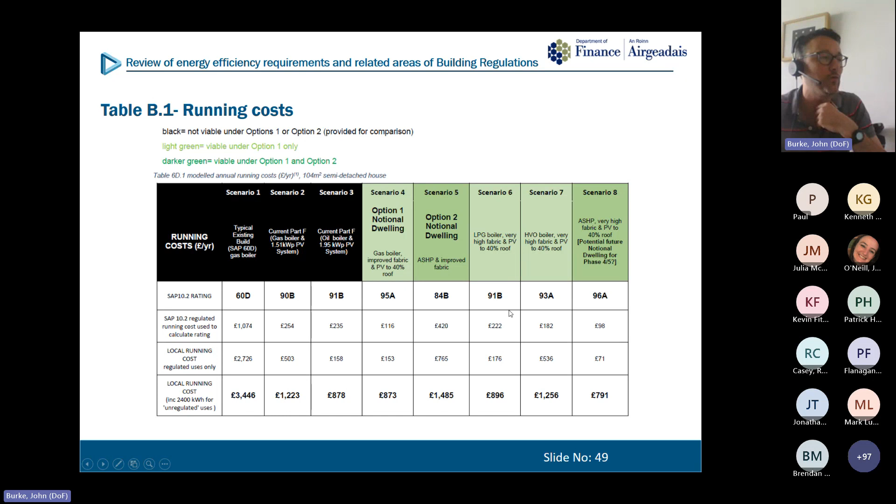We've commented before, but we do talk about potential improvements. We see 3 potential ways that you could maybe improve or help deal with this running cost issue on option 2. One is obviously to use a more efficient heat pump. Two would be to improve the building fabric, and three is to add renewables.

But adding the 40% photovoltaic and improving the fabric did this, and we're interested in whether there's a more appropriate heat pump specification. Although what we used we felt was pretty mid-range as it was, so we're not sure of where that might go.

It's interesting to note our assumptions on the pricing, based from prices back in April. There's not a huge change in the uplift because you've had to move from oil to gas. Although you've saved lots of kilowatt hours, they're being charged at a higher gas price. So you're moving from £878 for oil to £873 for gas. Dropping oil by abandoning fuel factors is really quite a significant issue.

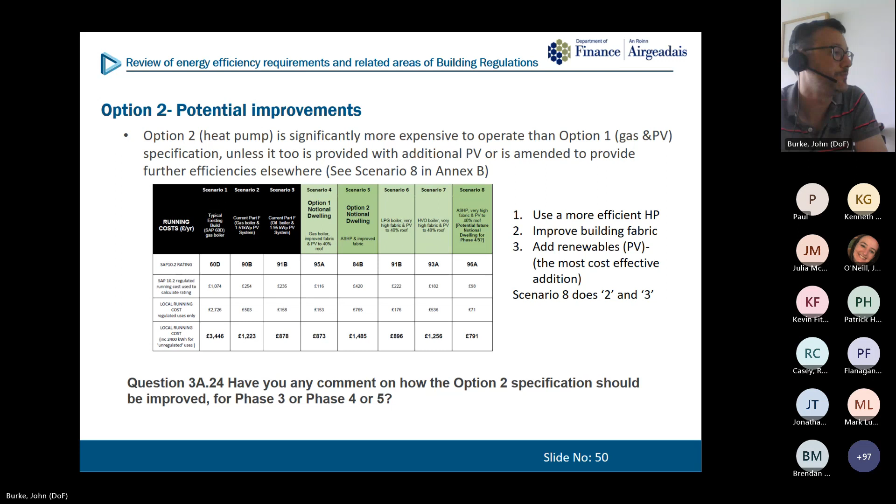Similarly, we've discussed emissions and that before, and these various carbon factors.

So if we could draw a breath for one second, I'm going to be even more speedy on proposals for new buildings other than dwellings, and hope we can get through this. In general terms, whilst you have more complicated buildings, a wider variety of buildings, cooling could be the significant issue.

So our intention in this section is very much to follow England, to be honest. We do discuss the differences in the other nations where we can, where a direct comparison can be made. But the overall direction of travel is that if we were to invest any of our local resource on anything, it will be on the dwelling side. So we'd expect to take a more follow-England, or follow-England-but-learn-from-other-places approach to the non-domestic side.

Despite all the complexities, obviously Part F assessments follow the same basic principles: modelling against a notional building, limiting fabric standards, limiting services efficiencies. In this case it also includes limiting unwanted solar gains, because the overheating assessment is no longer within SAP - it becomes a separate exercise, a separate building regulations part. So limiting the unwanted solar gains is still kind of inherent in the non-domestic assessment.

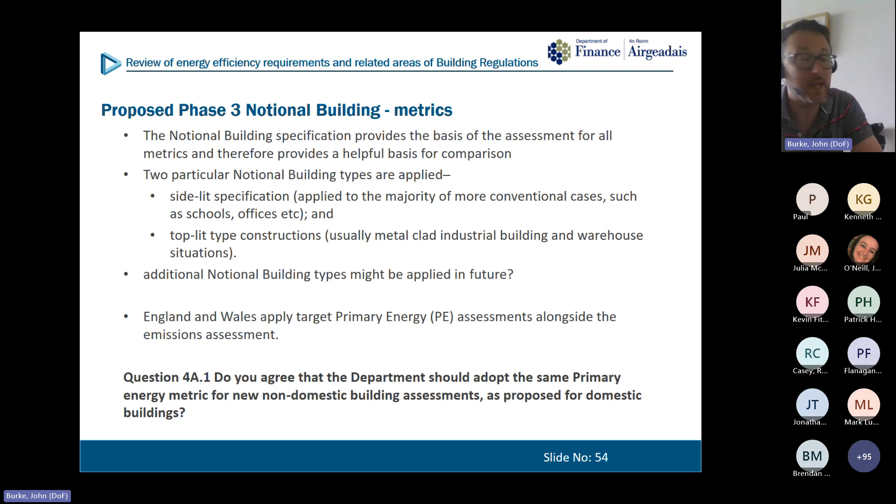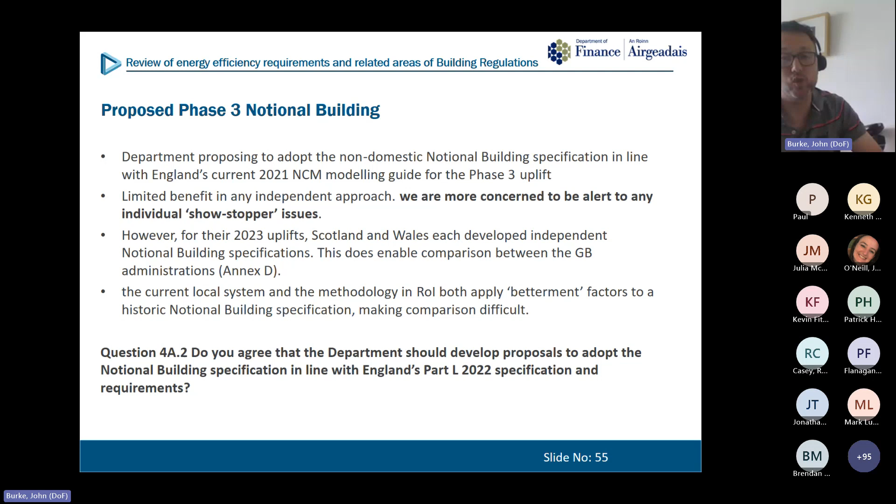And the big new change is that England, although Wales has always applied it, England and Wales have applied a primary energy target alongside the emissions assessment. So we would expect to follow that general approach, and we're really interested to hear if anyone has experience working with the system in any of the regions, if there are any showstopper issues that they would see impacting here.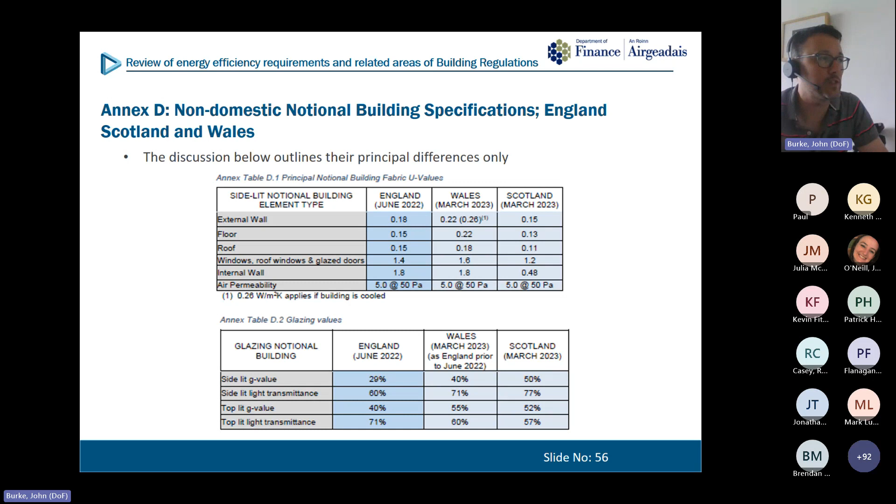We go into detail in an annex on the comparisons. So as an example here, this looks at the notional buildings fabric U-value assumptions. It's interesting that some of the values in Scotland are actually a little bit lower, but some of the G values for the glazing are different as well. England seems to have uplifted the glazing requirement with a view to prevention of overheating being more of a problem. That's all explored within Annex D - you're welcome to review that.

But one of the key things, of course, is the notional buildings fuel assumptions. It's a similar effect to the removal of fuel factors. The old NCM, the current NCM that still applies here, is that whatever fuel you're using in your actual building is applied to the notional building. So if you're using oil, you're assessed against oil; if you're using LPG, you're assessed against LPG, and there's no real penalty for having done that, despite this notion that you're developing an emissions assessment. That target changes depending on the fuel you use.

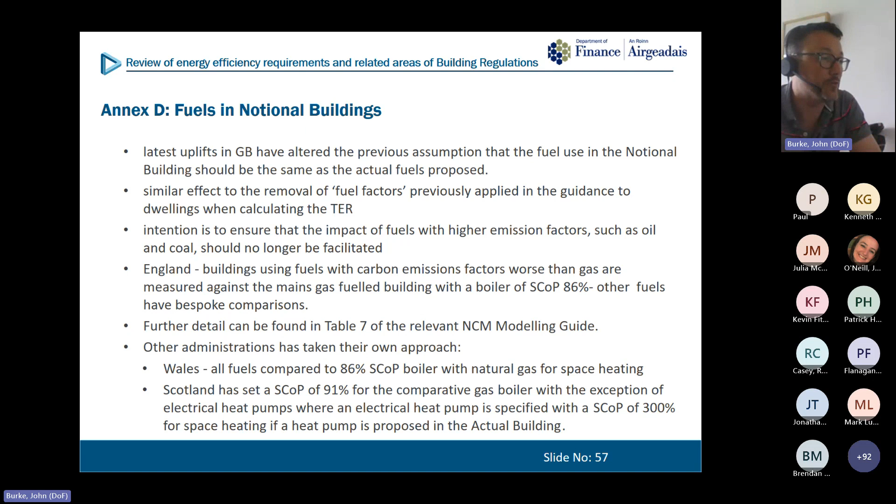Table 7 in the NCM modelling guide outlines the proposals in each of the regions. England has changed it so it's really comparing to gas in the vast majority of situations, and then for fuels with a carbon factor better than gas, it has relevant specifications closer to the fuel that's used. Wales has gone for gas throughout, and Scotland has gone generally for gas, but with an exception for a particular treatment for heat pumps. That's all explored in Annex D.

So this is the table for England. Generally speaking, if you're using natural gas, LPG, fuel oil, manufactured smokeless fuel, coal or anthracite, you're compared to natural gas. If you're using waste heat, you're compared to waste heat, but with an efficiency of 63%. So there's a generosity applied in that way.

If you're using a heat pump, you're compared to grid electricity with a heat pump at an efficiency of 264%. These things, we think, having reviewed it, make the English approach more in keeping, or more straightforward, and would be the most relevant. So that's what we've proposed, but you're welcome to look at the other regions if there's anything relevant there.

Heat networks - England has proposed this. An important aspect here is that biofuels aren't restricted in the same way, because you're comparing like to like. If you use a biofuel, you're comparing to a biofuel. So on the domestic side, whilst we saw impacts potentially for wood pellets and things, we wouldn't see the same impacts on the non-domestic side. That was an important aspect.

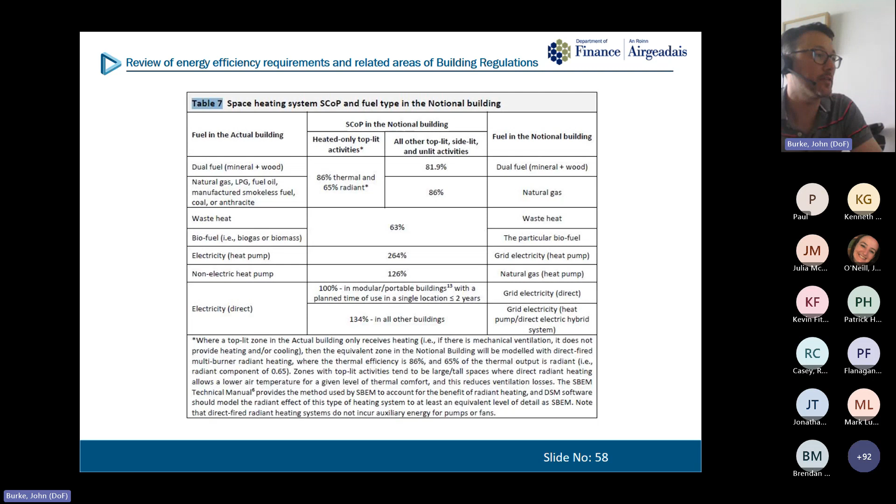Similarly for heat networks, the same general principle was expected to apply as in the domestic assessment. So if you connect with a new heat network, it was expected to perform and you'd be compared to a gas building, whereas if you were connecting to an existing network, you could use its characteristics.

Where a heat network is new, the notional building will use this figure for its emission factor, which isn't too far from gas - it's a bit more generous. Whereas in Scotland and Wales, they compare absolutely to gas. So the pipework distribution losses and things could be harder for heat networks if you fall under the Welsh and Scottish regime - could be harder to achieve.

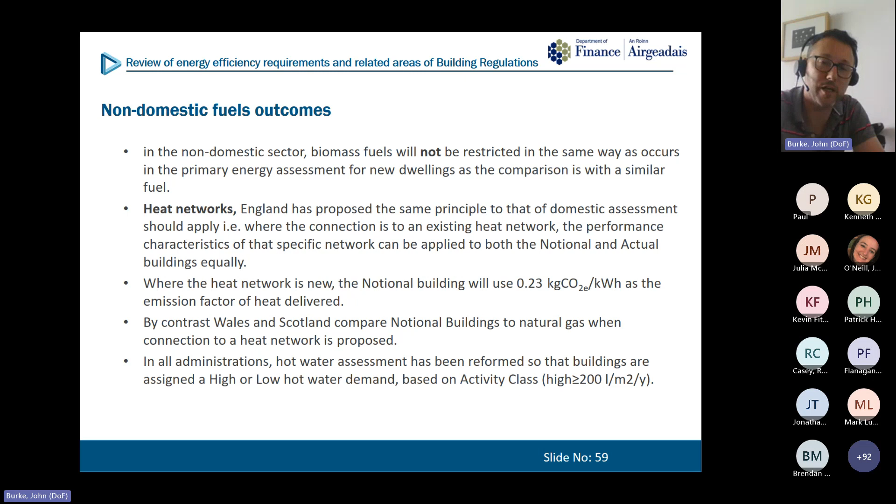In all administrations, hot water assumptions have been reformed. There's been changes in the background about assumptions about hot water use, classifying buildings or activities into high or low water demand. So schools, for example, have different assumptions about hot water use. That applies in all regions, so we'd expect that would be adopted.

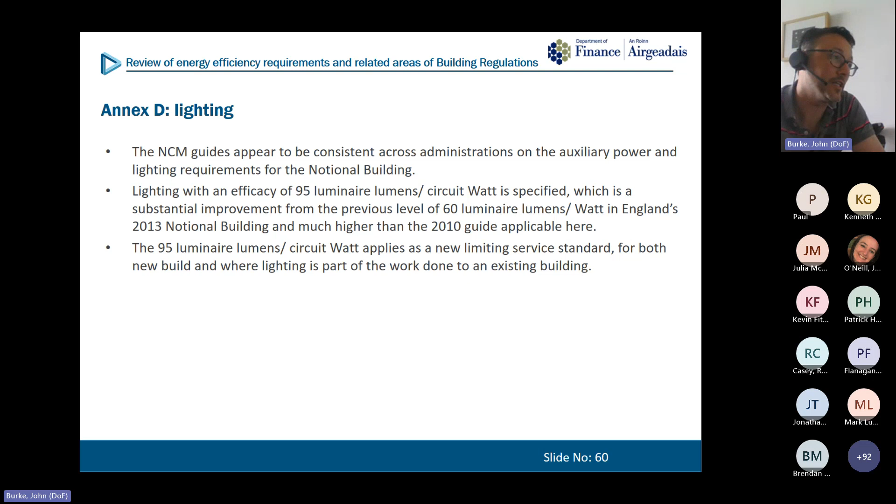There are changes in terms of lighting and auxiliary power, but they're similar in all the nations, and there's nothing there that we see as too extraordinary.

One of the significant differences across the regions is the notional building assumptions about how much photovoltaic is applied. England have based it on the foundation area, i.e. the roof plan area. Wales sets an expectation based on the gross floor area, and Scotland uses the same approach, but has a higher level of application, with a lower maximum amount. So that's all up for discussion as to where that would go.

Our expectation would have been that one would follow England on it, unless someone comes back to us telling us that's really not deliverable here - perhaps our grid isn't suitable for it, or there are particular issues. So that's why we've put the consultation out, to try and hear that feedback if there is any.

And with these variabilities, we wonder sometimes if this is the key thing that determines why Scotland argues it achieved an X percentage uplift or whatever, whether when it looks at all its building types, these differences can somehow apply that. But obviously basing it on gross floor area becomes a problem if you have a tall multi-storey building, because you may not have enough roof to put that amount of photovoltaics on. That's why they've got these percentage area maximum limits.

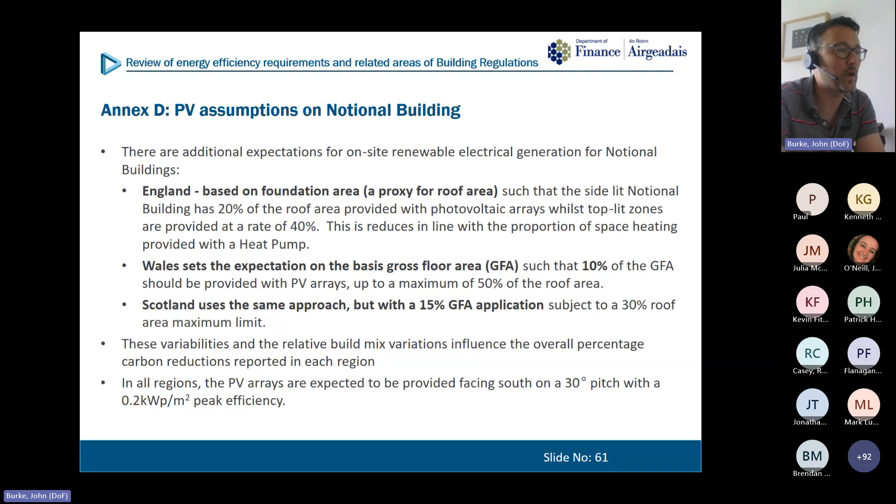In all regions, the PV arrays are expected to be provided facing south on a 30-degree pitch. That's just the assumption as to how the photovoltaics in the notional building have been provided, and what their performance would then be.

There are then, of course, new limiting fabric standards, and that's discussed in detail in the document. Again, you've got this issue about a whole building approach currently being permitted, offsetting these things in Northern Ireland and in the Republic.

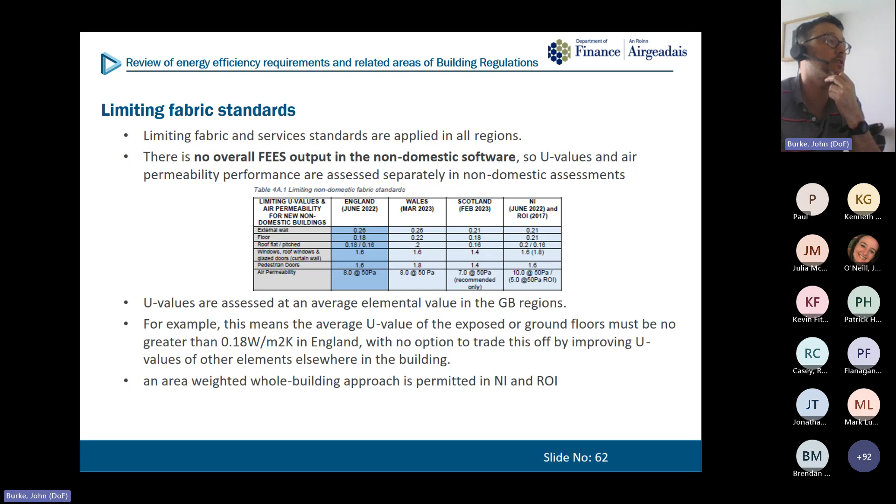Whereas there's no option for that kind of trade-off under the approach on the non-domestic side in the limiting standards in England. Adopting England's standards on this would reduce the current flexibility offered by the whole building assessment approach, but it would ensure that no single fabric element can be of particularly poor performance.

And the key thing in real terms is how quickly can we just adopt this software? If we make changes to try and continue with the current limiting insulation values and U-values and things that we have, it could delay us actually getting on with it. Whereas if we can follow England, we can move more quickly.

Air permeability requirements are looked at. Again, we're interested in trying to explore if you could go better than England and Wales's 8 cubic meters per hour per square meter at 50 Pascal limit. So they're saying you can't be any worse than that. We're wondering if we ask a question if we could go down to 5, and that would keep us in line with the Republic of Ireland.

Again, the issue there is whether the assurances on ventilation systems and things will deliver, but we think that in non-domestic settings, there's likely to be more professional involvement and oversight and commissioning in those circumstances. And so in non-domestic scenarios, we're wondering if 5 would be appropriate, whereas on the dwelling side, I think we were looking at 6 and 7, something like that, as potential limits, because there's perhaps a little less oversight of the systems currently occurring, whether that's right or wrong, whether that's a good thing or not.

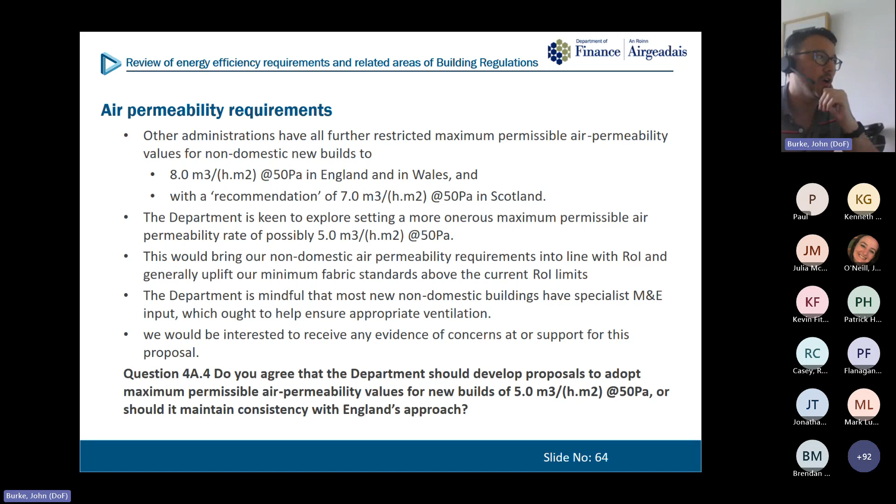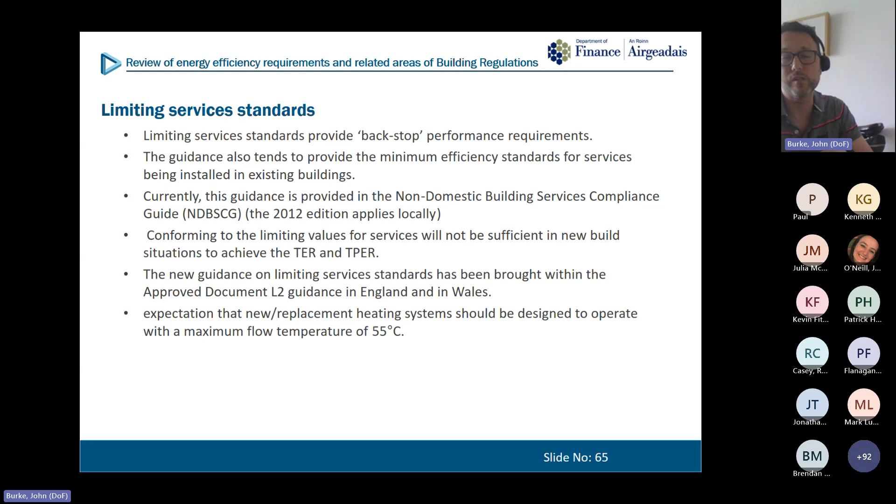Limiting services standards are outlined in, I think it's Annex E in our document, and we still have this expectation of 55-degree operating, so you're looking at low temperature systems. The other key change is that the guidance would be brought into the technical booklet guidance, so you wouldn't have a separate non-domestic building services compliance guide, again, similar to the dwelling side. So Annex E outlines these changes.

The figures in brackets here on the right-hand side are the current standards that are the limiting performances. So you can see modest improvements here in a range of areas, but it's been a while since our limits were uplifted. So we don't envisage that there's anything there that's terribly challenging. But if there were to be, now's a really good time to let us know if you're involved in provision of some of these services and finding that it's really difficult to meet this minimum requirement in other regions, or if something is jumping out at you there, some kind of tipping point or threshold in a system. We'd be interested to know about it in the feedback to the consultation.

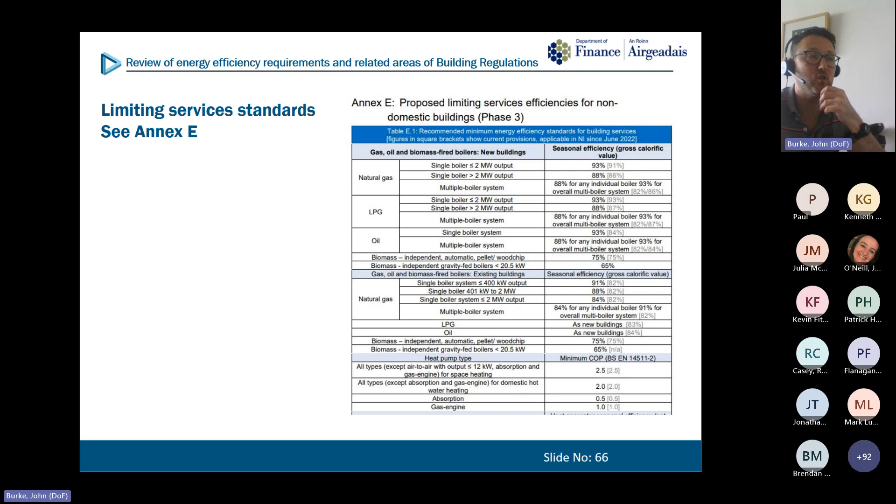There's some new guidance about BACS, building automation and control systems. So you require these building management systems in certain scenarios, and there's a question about whether that should apply at 290 kilowatts or 180 kilowatts. It stems from a requirement from the EU Energy Performance of Buildings Directive that hadn't yet been implemented, and this would be the building regulations bit of it for when work is being done.

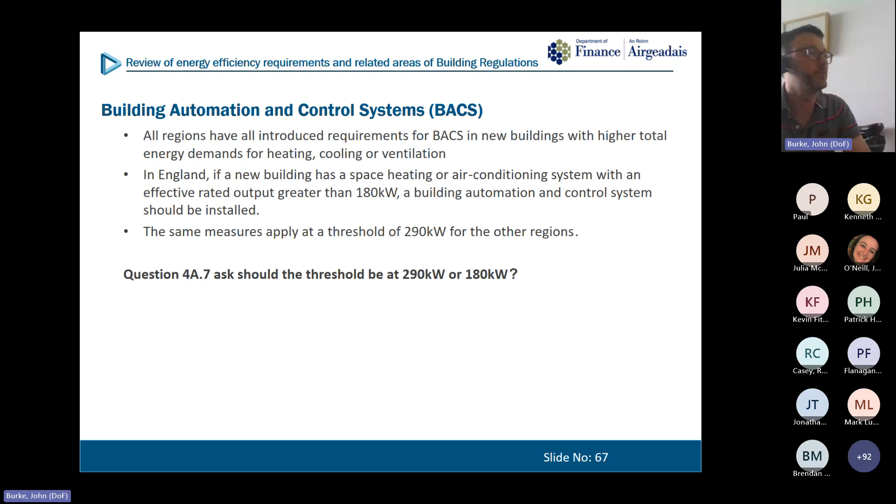There are also, and this is a significant aspect actually, additional reporting requirements introduced in England, whereby more precise dynamic simulation modelling or a more precise annual forecast of energy use by fuel type is required where a building has a useful total floor area of more than 1,000 square meters. So that requires more review and another modelling exercise beyond just the NCM to try and give your client an accurate depiction of where it's really going to go, as opposed to just demonstrating compliance with the building regulations. We're interested to find out if it could be a relatively onerous requirement.

Scotland has a different assessment. It has a requirement on direct emissions heating. Direct emissions heating is any heating where combustion is taking place on the site and there are emissions coming out from that combustion on the site. So Scotland is asking for an explanation as to how you're going to convert this building in the future to a zero direct emissions heating scenario, and that report is part of the submission. So you would need to provide that along with your proposal. So we're interested as to whether that would be an appropriate thing.

Our concern on direct emissions heating would be that hybrid boilers would not fulfill the requirements, because they're still combusting some fuel on site, even if it's a very small amount. And hybrid boilers could be a significant or helpful transition route. So that's something that needs consideration on that side of things.

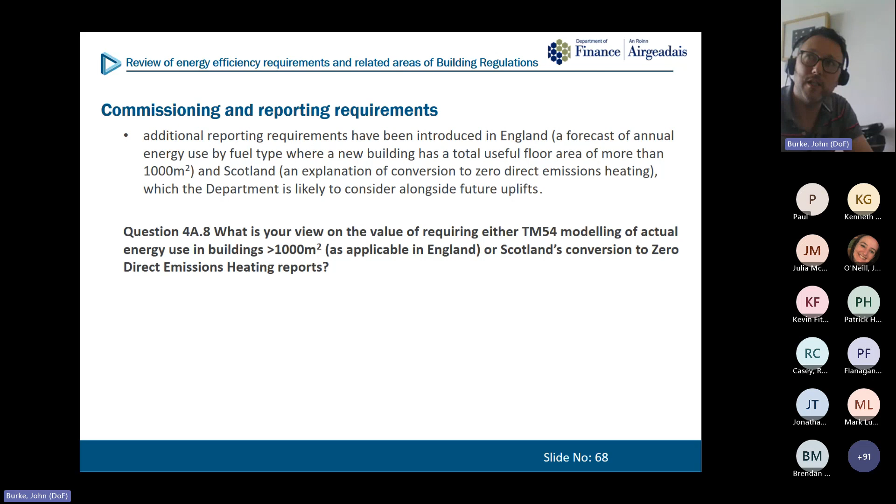My word, I can't believe I've actually managed to get through all that. So we've got five or 10 minutes here. If anyone has managed to